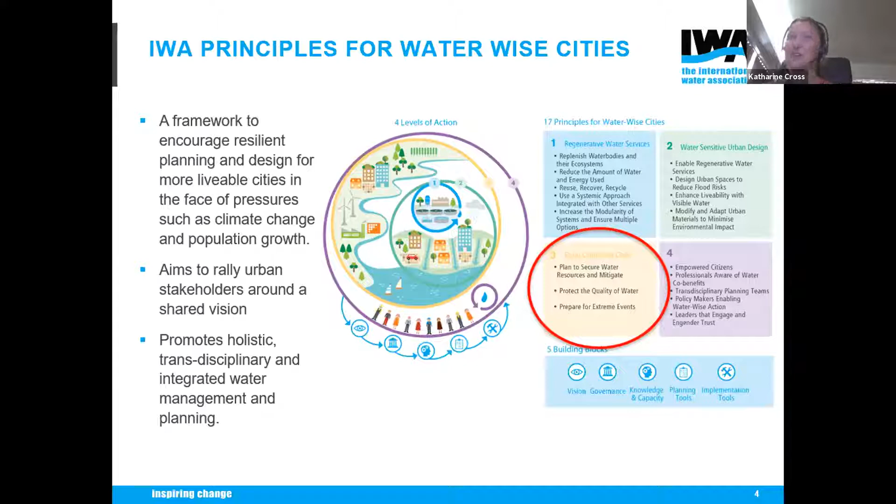So to give some context, basin connected cities, when I talk about that, I'm really talking about a system of systems. So, for example, we can reuse water from urban and peri-urban areas in ecosystems and also in agriculture. Water efficiencies in agriculture can improve water supply to ecosystems and ensure water supply in urban areas. At the same time, increased water efficiencies might mean there's less return flow to ecosystems, so that has to be taken into account. Ecosystems provide services such as flood mitigation and groundwater recharge.

And ecosystems also provide green infrastructure that can improve the quality of water by healthy watersheds or constructed or natural wetlands, which can help improve water quality, so less money is needed for chemicals, and then maybe less energy is needed for water treatment. Then urban and peri-urban areas and agriculture produce waste that can be potentially used for creating energy in the form of biogas. Ecosystem services can be used for reducing pollution, as I mentioned earlier, and also for carbon sequestration.

So this showed examples of connections with the watersheds we rely on. So in this context, IWA in 2018 released the Action Agenda for Basin Connected Cities. And this builds on the principles for water-wise cities, but really looking at that third level. Thinking about how can we achieve water security within our watersheds in the coming decades, but also what can we do now? What can urban stakeholders do now to achieve sustainable management of basins into the future?

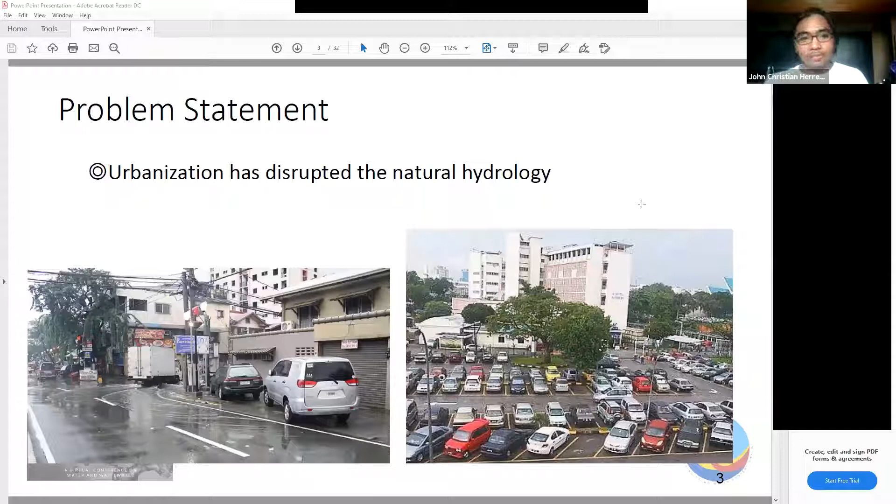The impact of urbanization is basically this: from natural ground cover, as we increase the number of roads and buildings, we increase the impervious surfaces. Our old infiltration when we had natural ground cover was around 50%, turning to about 15%. In turn, because it's a water balance, the water just goes from infiltration to runoff—we also turn that 10% of runoff back to 55% once we're in an urbanized state, like Metro Manila.

So what we're proposing is to basically mimic the natural hydrology, and to do that, we have to copy natural processes. So what we're trying to do now is take that infiltration from a low 15% and get it as close to 50% again as possible, and in turn possibly and surely decrease that runoff from 55 to 10.

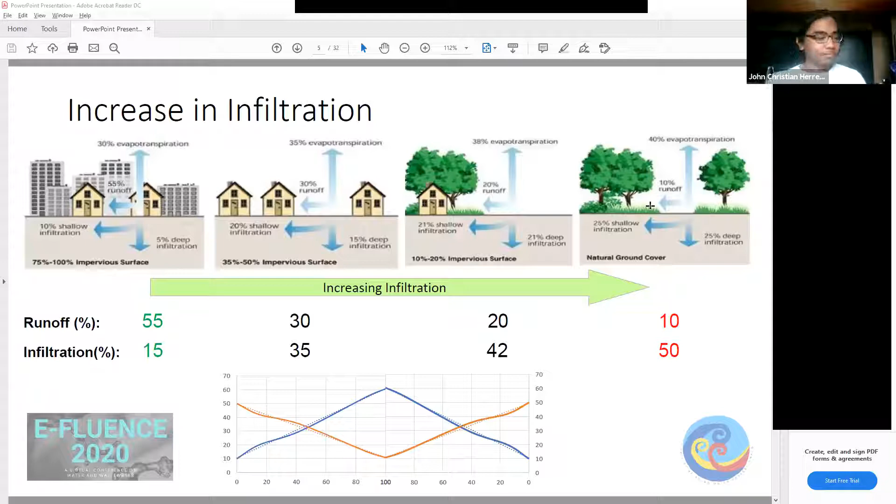To do that, these are green infrastructure that we use within our existing systems. This is a type of system within the bigger system, as we mentioned before. It's a very good thing to add in sustainable urban planning, because what we're doing now is using oversized pipes and flow control devices—these mechanical means—to handle all the water management we experience when it rains.

What we're doing is slowing down the water so we could manage it, doing flow control and detention using detention tanks and such. But if we open up to the ideas of nature-based solutions like LID, we're able to tap into more biological means of managing our water systems to supplement our oversized pipes and flow control devices. Instead of just slowing it down, we could spread and soak this water, possibly filtrating it, infiltrating it into the soil, and even treating it. So that hits both the problem with quantity and quality of water.

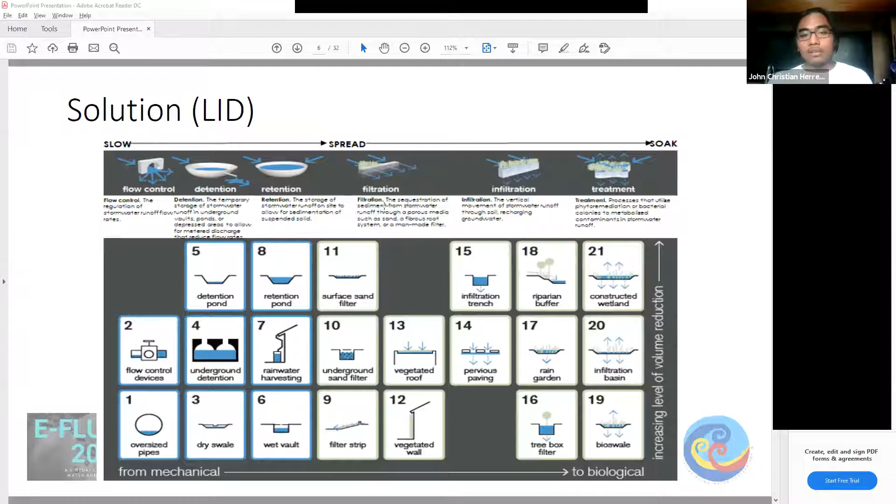In this specific scenario, we'll be talking about the infiltration trench and the rain garden, because those two focus on infiltration. The infiltration trench is a device with a media where it lets water accumulate and then seep into the soil, while rain gardens are sort of the same. These aren't necessarily to replace the oversized pipes or flow control devices—they're there to supplement them. Instead of letting our oversized pipes carry the entire load of our water resources, we could split it into the infiltration trench, reducing operational costs and supplementing their services.

So what exactly are we trying to do here? In this specific study, we're trying to investigate the effect of applying these LIDs, infiltration type LIDs, into the water balance of an urban catchment in San Juan City.

To do that, we have to check the viability of the LID. How well does it work? The second one is to develop a method with the available data. As you may know, here in the Philippines our data is not as complete as compared to first world countries like Korea or the US, where this type of study is more dominant. So what we're going to try to do here is design and study this further.

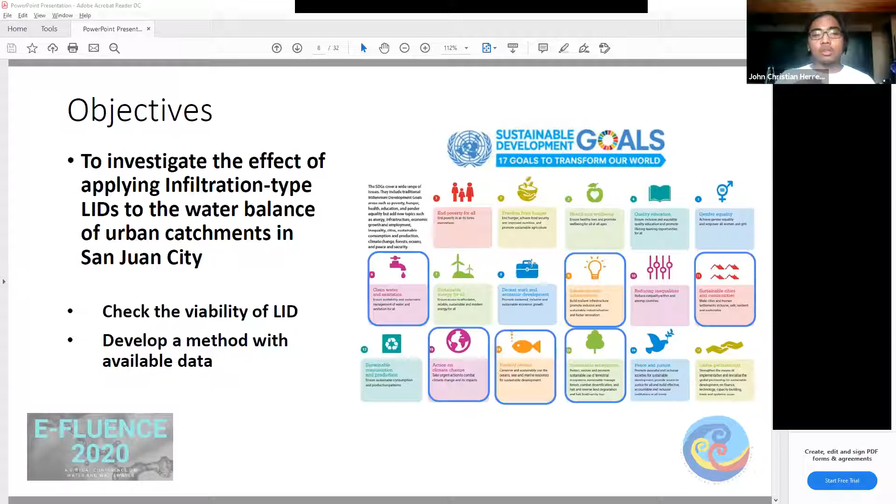You might be asking, why are we actually choosing San Juan? Well, that's because it's under the Philippine Clean Water Act of 2004. It's called a Water Quality Management Area, an area designated as a focused area that we should clean because it does affect a bigger watershed, as we mentioned a while ago.

The larger watershed is what we're trying to protect by protecting the city. In the San Juan River system, WQMA, we're basically going to be cleaning up the San Juan River from the source, from the city itself, instead of cleaning it at the output point.

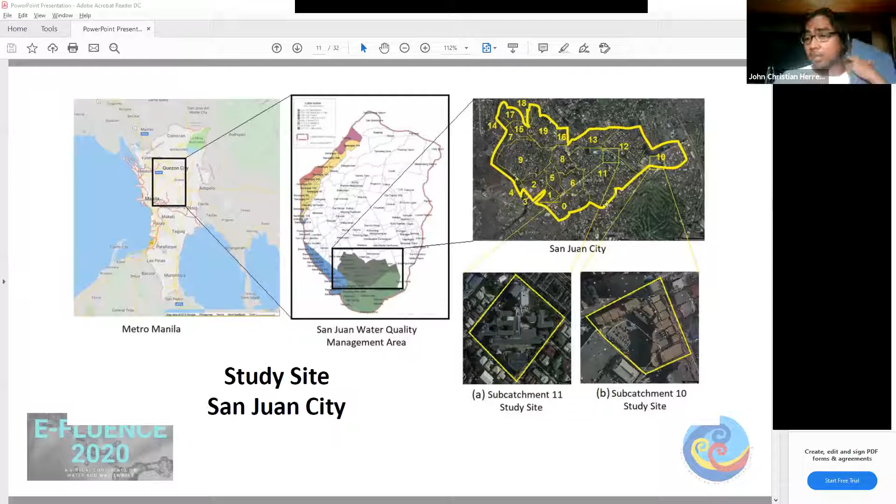So this is our study site, San Juan City. It's actually within a bigger area called the San Juan Water Quality Management Area, which includes Quezon City and Mandaluyong. But for this one, we're going to be focusing on San Juan City. In San Juan City, we chose two specific subcatchments, subcatchment 11 and subcatchment 10. They're basically office buildings, parking lots, schools, factories, etc. Those are the kinds of surfaces we're going to be seeing.

Our method is quite simple. We gather the input data from Pag-asa, NAMRIA, local government units—rainfall data, topographic map, land use—and we use Google Earth. We input that data, analyze it, characterize the rainfall, delineate using QGIS, observe the land use, and assign runoff coefficients, etc. We basically make it compatible for SWMM, the model. Then we plug it in, and from there we get the infiltration, the runoff, and the storage. That will be the water balance of that specific scenario.

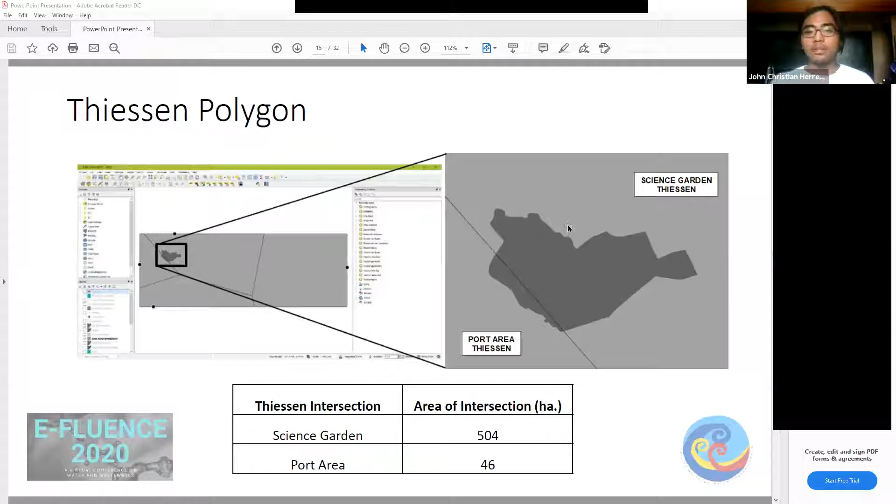So we got two rainfall gauges in our area, and in those two rainfall gauges we basically got a 30-year total annual rainfall of about 3,000, 2,700 millimeters. That's important data because if you design this in Korea, it would be a completely different rainfall. In fact, if you design it anywhere else in the Philippines, you would have a completely different rainfall as well because we have 4 climate types. So that matters when we're designing.

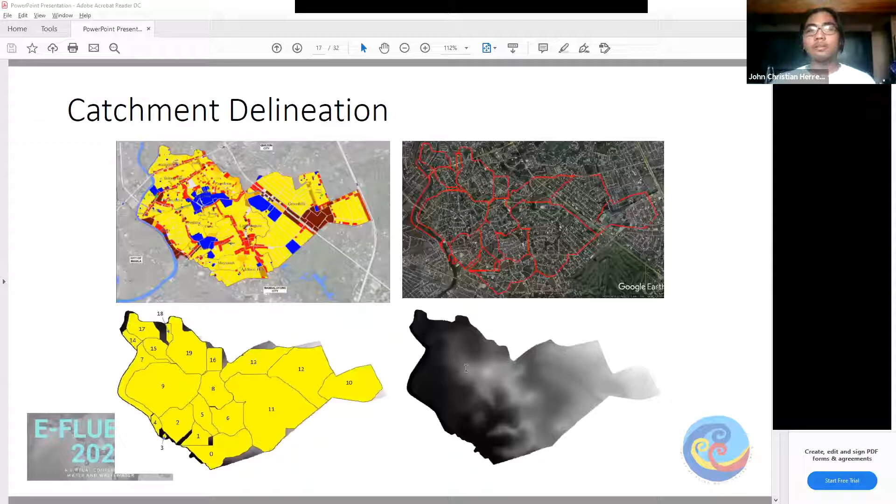When delineating, we got the topographic map, ran it into QGIS, and got about 20 subcatchments. We delineated it using runoff coefficients, which we got from JICA, the design guidelines. In modeling, we use 2 infiltration rates, hydrologic soil group A and D, with the highest and lowest infiltration rates of 1.63 and 0.06 inch per hour.

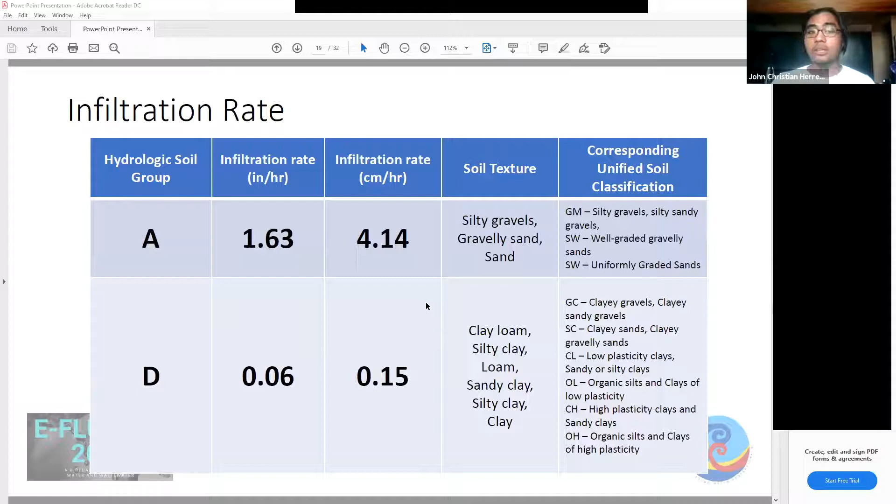So this is the 90th, 80th, and 60th percentile rainfall that I explained a while ago. The cumulative frequency occurrence is basically the amount of rainfall that you could capture if you design your device to capture this much water. For example, we have a rainfall event that's 42.2 millimeters. If you design your device to capture 42.2 millimeters of rain, you will capture 90% of the rainfall events in that year.

The rest will probably overflow. The same goes with the 80th percentile—23.5 millimeter rains—if you design it with that, you capture 80% of the rainfall. The same goes with 60. That's important because when we're designing LIDs, you're not trying to capture storms.

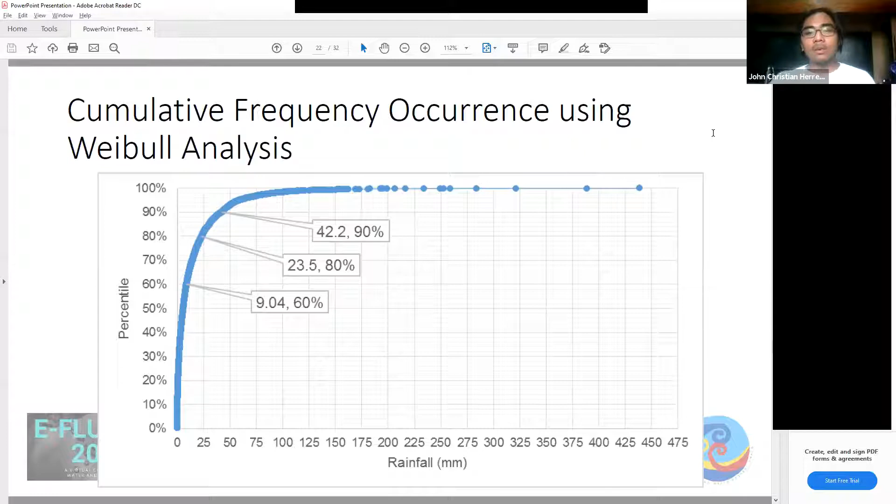We're trying to capture the majority of rains. In normal rainfall, we don't want it to flood, so basically we're just going to divert it into our device. We got all those data and we put it in SWMM.

It does have a built-in LID control to simulate, and this is the findings that we got, the water balance. We had, within this slide, the 30 scenarios.

These are the charts based on soil type, and this is the chart of all the numerical data. Dark blue means infiltration, light blue means runoff, and the green is storage.

Storage is basically the amount of water stored in the subsurface, so that's normally about the same. But what does change and what does matter in this specific study is the infiltration and runoff. The first thing you will observe is that without LID controls, you could see a significantly low infiltration rate.

That's 8% in a 90th percentile rainfall, that's about 42 millimeters, or 42 a while ago. And that's 14 at an 80th percentile rainfall. Basically, it's lower than what we should expect. Hydrologically, it's supposed to be about 50%, but this one's closer to the 15% that we saw at a highly impervious city.

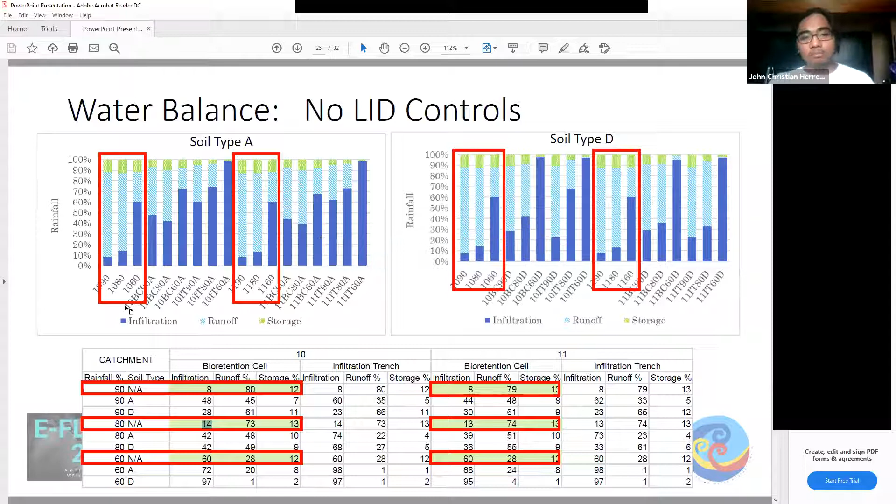So we're going to be comparing the 90th percentile on the next one. In the 90th percentile, we're going to be comparing without LID controls here with the two LID controls, bioretention cell and infiltration trench. You can see here that without the device, it's about an 8% infiltration.

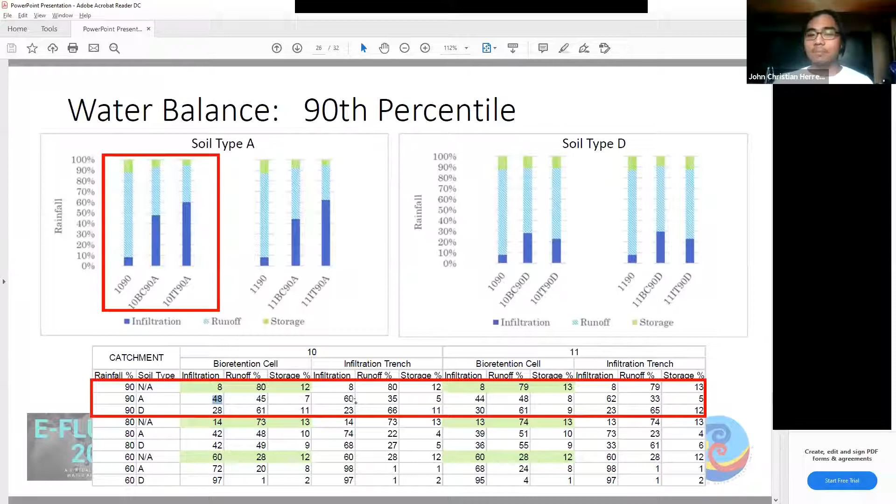But with the bioretention cell, that goes from 8 to 48, that's a 500% increase in infiltration. That's more water that we're diverting away from the pipe, so it has less load to consider. And with an infiltration trench, it's even higher, up to 60%.

Comparing LID devices, the bioretention cell and the infiltration trench, we could see that the infiltration trench performs better when it comes to infiltrating, as it should, because infiltration trenches are focused on infiltrating a larger amount of water compared to a bioretention cell. A bioretention cell, while it may infiltrate, is more focused on treating the water using vegetation, so we should take that into consideration. Even though it has less infiltration, there are benefits in using a bioretention cell instead.

Also, it's considerably aesthetic because of the vegetation.

So to conclude, the study showed three things. One, there is a site sensitivity for LID. The variability of the climate, the soil type, the land use data, these are completely different based on the manual, are actually very sensitive. When you design them, you have to design them for that specific area you're designing for. You can't just get an LID from one place and plug it in another.

So studies and further research in the Philippines is actually quite important. There is significant infiltration with LID. The summary of water balances shows the significant increase, as we said a while ago. And because of that significant infiltration, there is a corresponding reduction in surface runoff. The water balance shows this relationship.

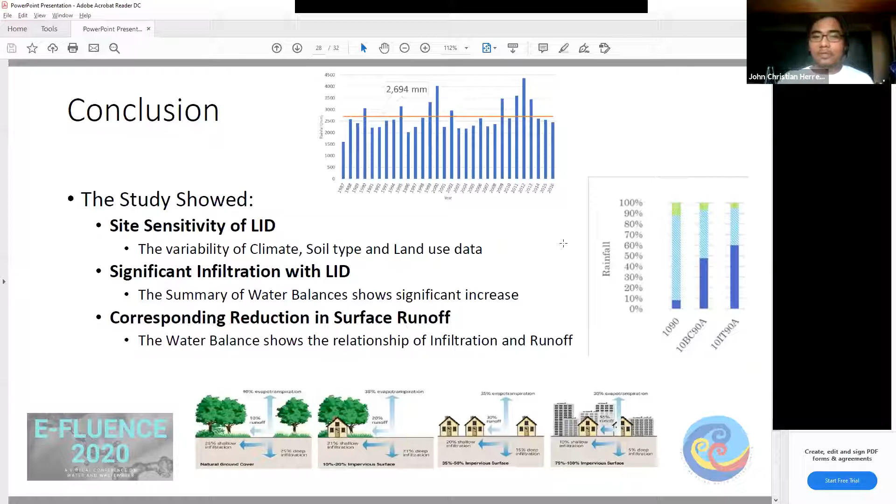Yes, so this is us now with our paved roads, buildings, impervious surfaces, and hopefully with the application of green infrastructure - green roofs, tree boxes, constructed wetlands, bioretention cells, infiltration trenches - this may be us soon with our green infrastructures and LID.

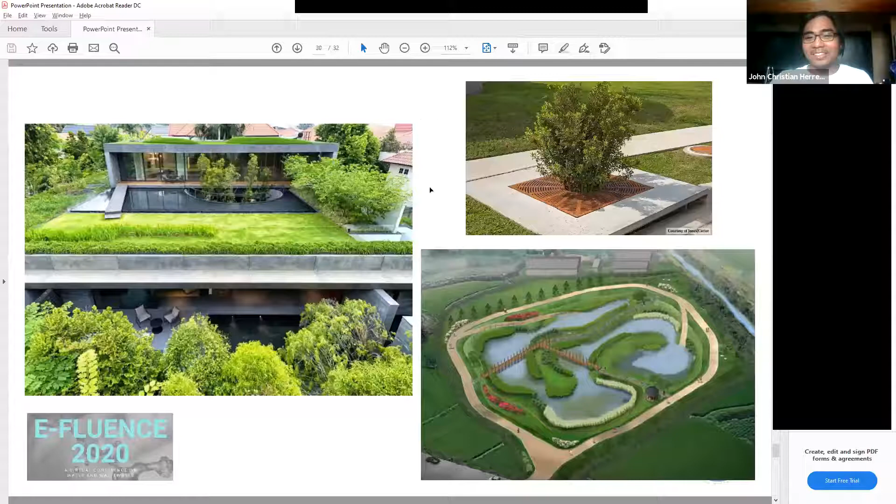You can see that this one is the landscaping LID. LIDs are actually very aesthetic and functional. So it's a step closer to water security by applying these functional and aesthetic LIDs. A step towards water-wise cities. Thank you.

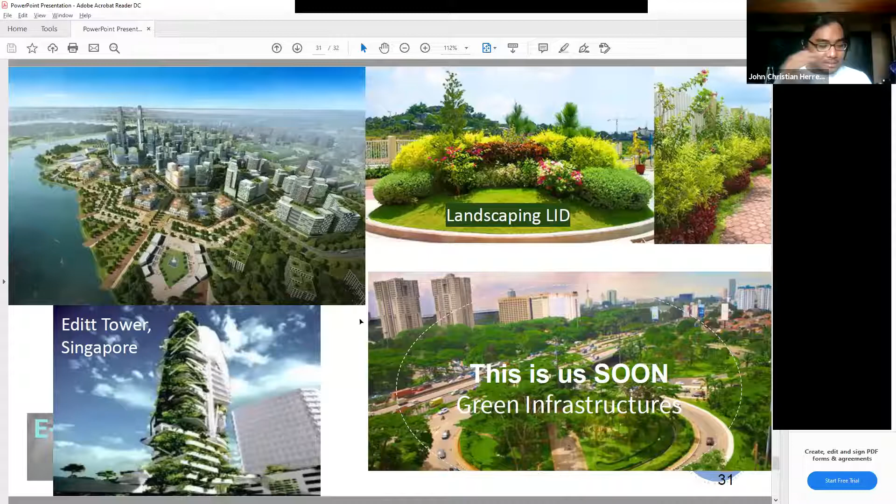And from stormwater management, let us move on to network pressure management for water utilities, network optimization. This will be presented by Engineer Rafael King Ramos, who has been active in the field of water supply operations with Maynilad Water Services Incorporated for 10 years, where he was a water network engineer in charge of supply and pressure management of a distribution network which covers 1.6 million customers. He's currently the head of Solutions Design Group in charge of formulating strategies in operational efficiency and technology adoption.

He co-invented and developed a system, controller, and method for controlling supply of fluid in a distribution network, published in 2016 through the IPO Philippines. His area of interest includes human-centered design and data analytics. He's a graduate of civil engineering from the University of the Philippines in Diliman and has obtained certifications in entrepreneurship and management from the Asian Institute of Management and Ateneo Center for Continuing Education, respectively.

For our second presentation, King. Hi, thank you, Yang, for the introduction. Can you hear me? Yes, it's clear. Okay, so good day everyone, or as we say in Maynilad, maginhawang araw sa ating lahat. I hope all is well sa lahat ng nanonood sa atin ngayon.

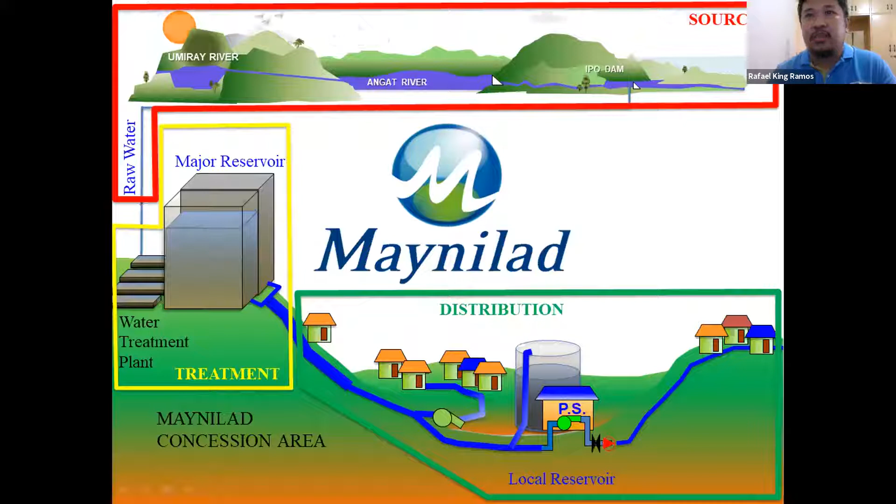Now, for my presentation, the focus mainly is on the optimization of supply and pressure in the distribution network. Prior to the new consortium, water supply availability and pressure are luxuries to our service area. In fact, we started with only around 60% coverage, and less than half of which had 24 hours of water supply. Also, one of the challenges is the high non-revenue water, or in short NRW, primarily because of losses in the network caused by this.

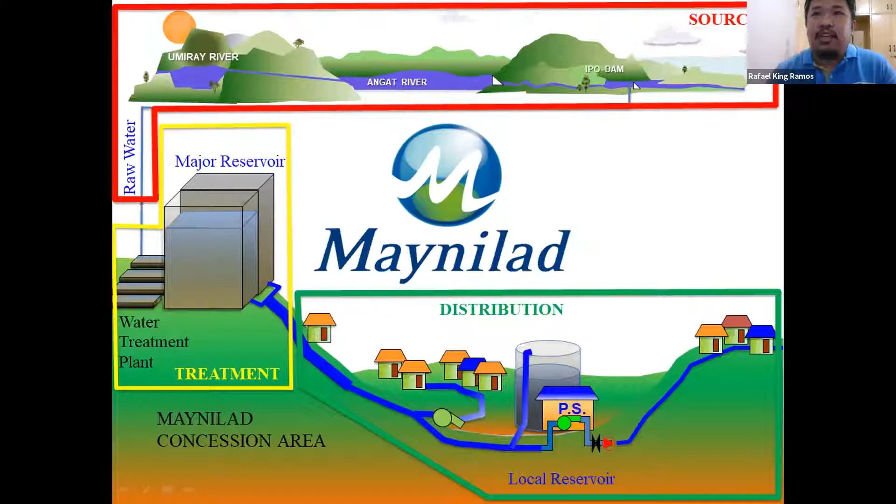If we look at the cross-section of a pipe, we can see from this illustration that pressure pushes water towards the wall of the pipe.

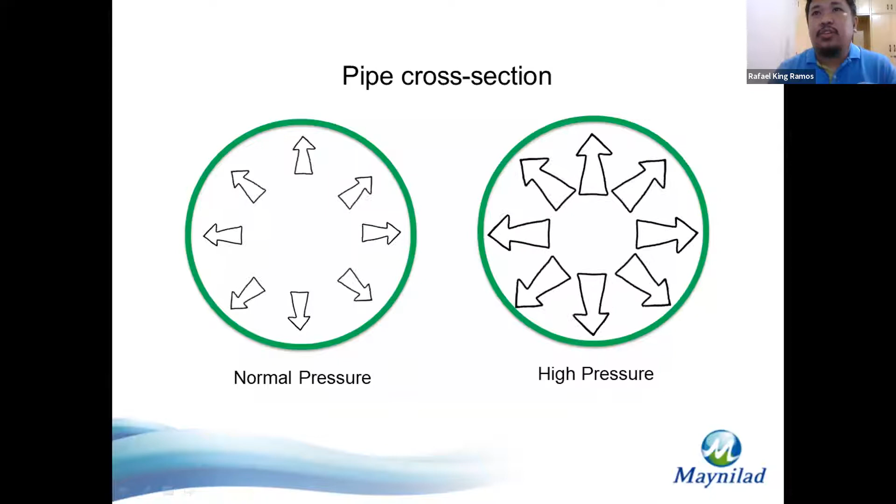This changes depending on the operation of the source and depending also on the demand for that water volume. Maynilad pipelines are designed to a maximum of 150 psi, but normally pressure in our lines is around at least 16 psi.

Going back to these photos, if you look closely at the illegally tapped lines on the upper right, the workmanship is, if I'm going to rate it, 0 out of 10. If that fails, and most of the time it will, there will be water losses.

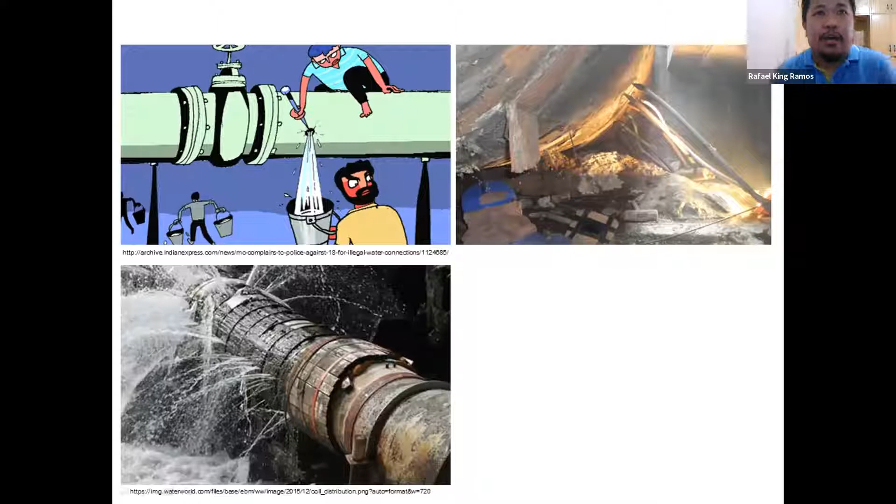For this one, like for example on the lower left, this is an example of leaks in the primary lines. This is in a way actually good for our NRW engineers because water leaks are easily spotted since it is above ground. But not all leaks are above ground, like this one in the photo, where the leaks are underground.

Now, based on what I showed you in the previous slide, pressure in the pipeline plays a major role in managing these leaks and losses. Pressure is actually directly proportional to leakages. So if you have high pressure, the volume of leaks is also high. So if you want a lower rate of leaks, you need to reduce your network pressure.

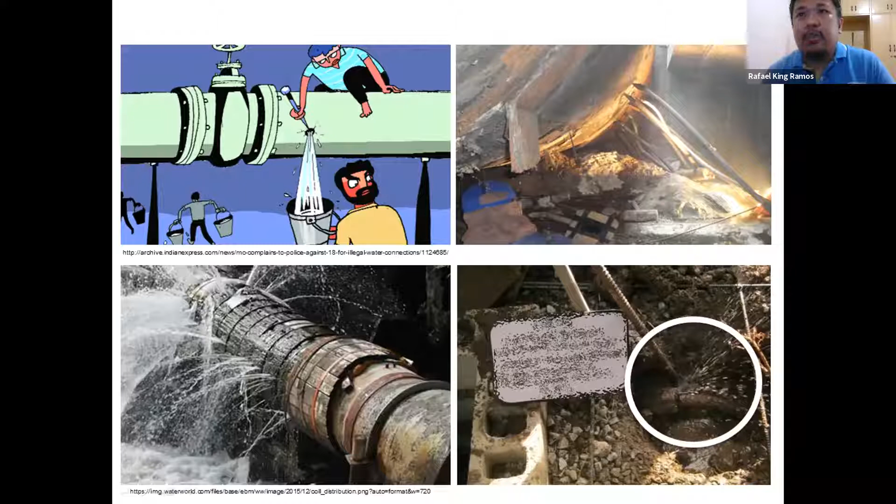But eventually we realize that there is a tension in our objectives in Maynilad. Looking closely at the distribution, there is a source, and then there are pipelines and customers at the end of the line, and then there are leaks, and then we have valves.

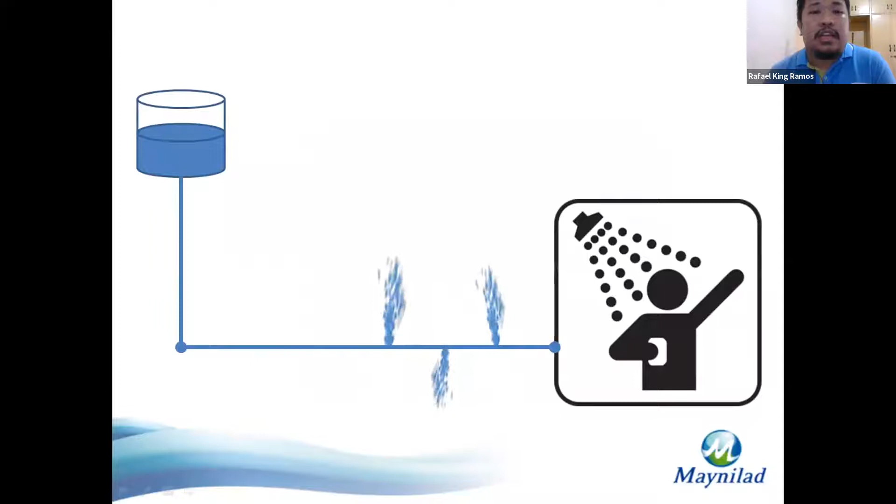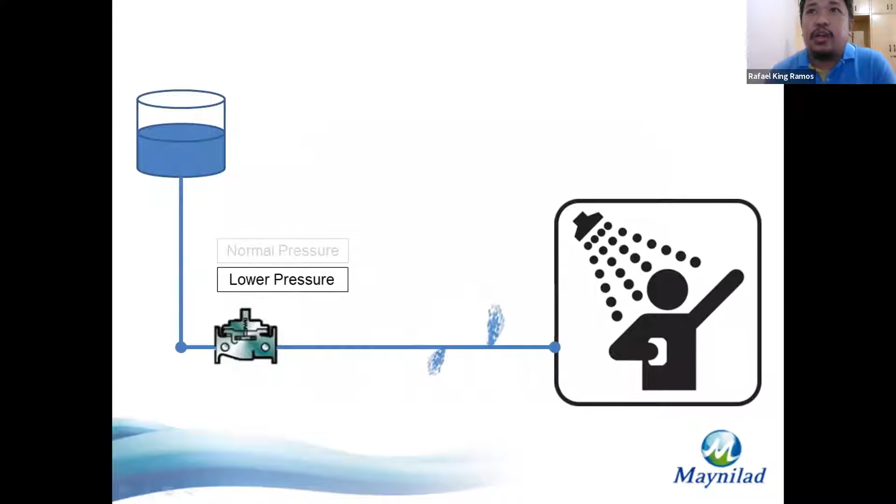So we say that we need lower pressure to reduce water losses in the network, and that is absolutely valid. When we lower the pressure, the leaks will be reduced, but on the end of it, pressure also affects the volume of water that could be delivered to our customers. So pressure management affects both leaks and consumption.

Actually, that's where the tension lies. So, considering the target to reduce leakages and the target to maintain sufficient pressure for customers' consumption, do we have a way to hit both?

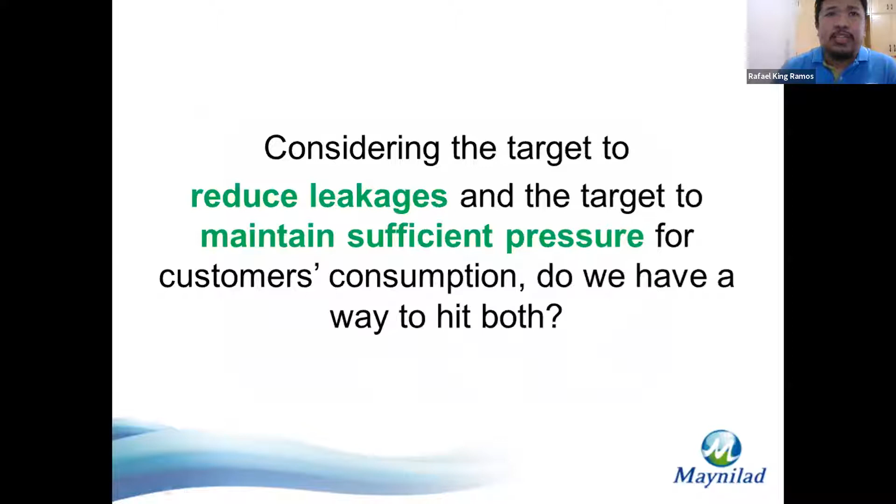This tension actually inspired us to develop the pressure management program in Maynilad, the pressure optimization in our network. So the goal of this program is to find the sweet spot. We need to lower pressure to reduce leaks, but not too low that it will affect consumption.

There are 5 major steps in our program, but for this discussion, I will focus on the analysis part. I will show you the workflow that could be used also by other water utilities on how to arrive at the optimum pressure considering both consumption and leakages. So, if you look into the context of data analytics, it covers the descriptive analytics and the prescriptive part.

So, at the minimum, your target area for pressure optimization should be isolated. This is commonly called DMAs, or district metered areas. But the general idea is it has to be one inflow only. For the data requirement, you should have flow and pressure measurement, flow and pressure at the source, and in Maynilad, we normally have measurement at critical points.

And then, by the way, the critical point is a point in the influence area with the lowest pressure. So if you can satisfy the required pressure at the critical point, you are assured that pressure at all the points within the network is within the pressure requirement. This is usually at the highest location, or at the location farthest from the source.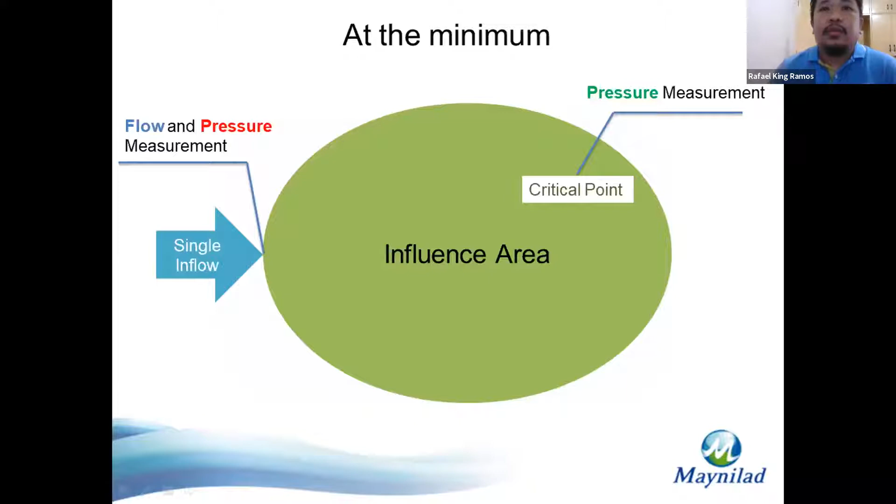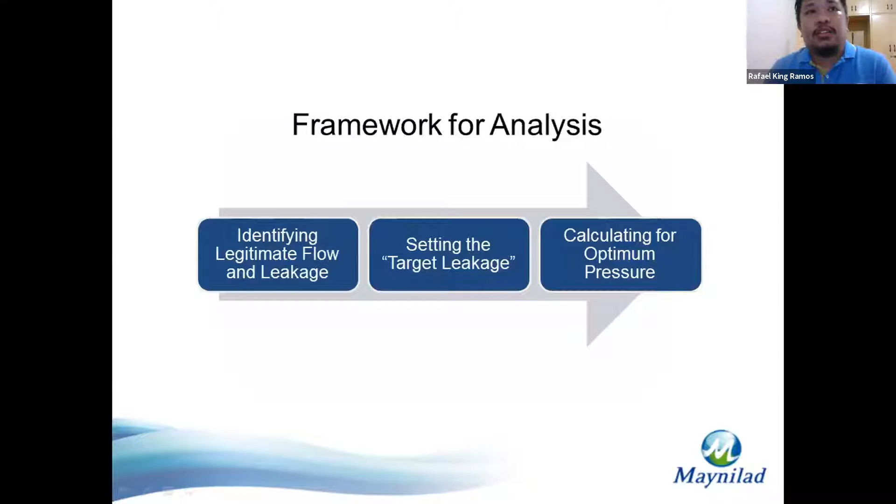This is the framework for the analysis. It's a three-step flow process. The first part's objective is to identify the legitimate flow and leakages.

From the continuity equation, it's actually easy to get this if you have flow measurement in individual customers. You will just subtract the sum of individual meters or individual measurements on all your customers from the inflow measurement, and then you will get the leakage. But it is not yet economical as of the moment, at least for Maynilad.

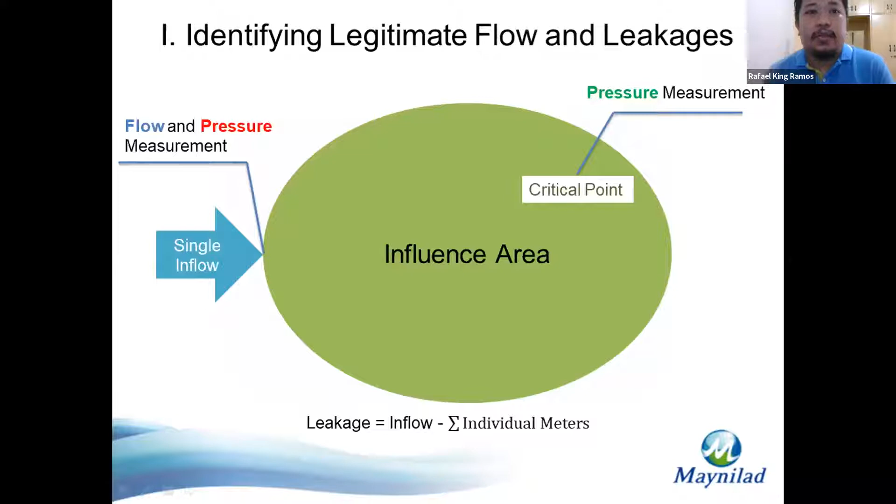So we use a different technique called the night flow analysis. The premise there is that reading at night time is consistent. So we read flow during night time, and then we go back after 1 hour, 2 hours, and then we read, and through that we will be able to identify the composition of that flow at that particular time. So we will arrive to this.

So we'll have the actual leakage and then the legitimate flow. Through night flow analysis, we'll be able to arrive at these estimates. And once we have those estimates, we will now calculate the composition for the rest of the hours of the day using the FAVAD concept. So the simplified version of the equation is shown.

It shows that changes in pressure raised to the power N1 varies with change in leakages. It was derived from the energy equation, so the velocity of a leak varies with the square root of pressure and the coefficient of discharge. But FAVAD also recognizes that the effective area of some leakage paths, the pathway the leaks go through, may vary with pressure. So that adjustment happens using N1.

Just to illustrate, leaks on metal pipes normally have low N1 values compared to softer materials like plastic and HDPEs. This is because pressure also affects the nature of leaks in these materials. For example, for HDPE, lateral cracks expand as the pressure inside the pipe increases. So the higher the N1 value, the more sensitive existing leakage flow rates will be to changes in pressure.

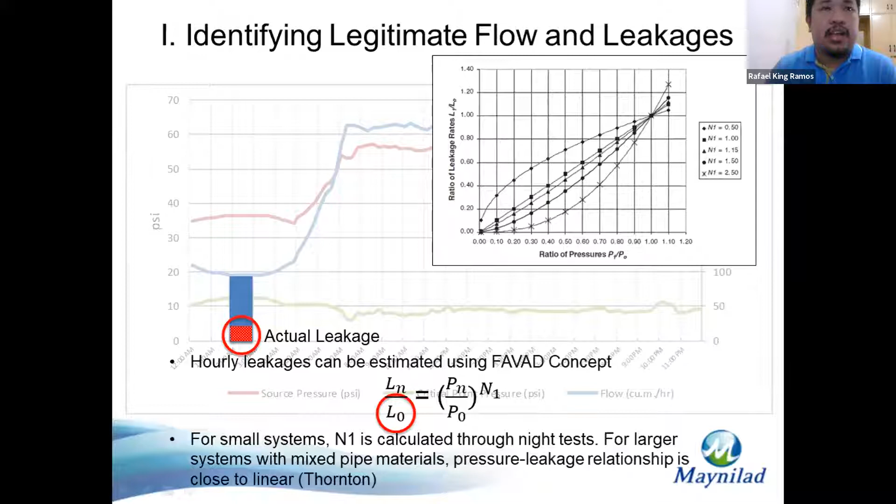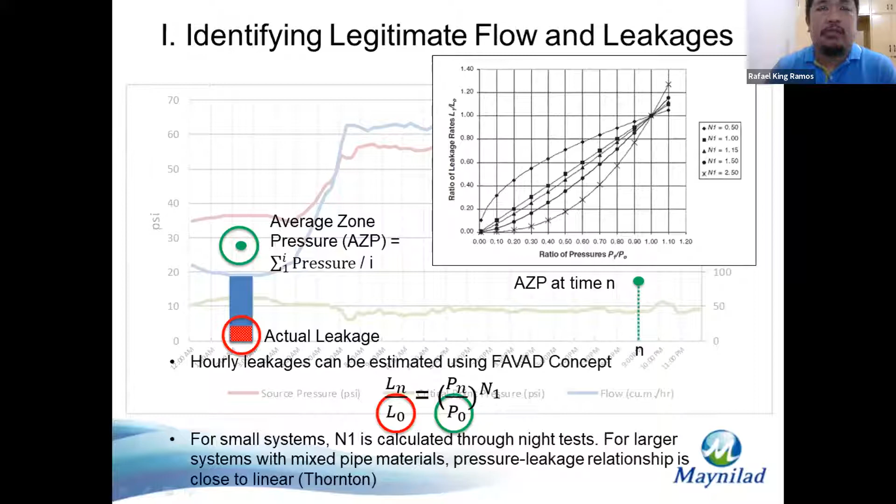The goal for this first step is to create the leakage model such as this one on the right. Actually it's just a matter of plugging in values. We'll use the actual leakage for L naught, then we'll get the average pressure, plug into P naught, then we'll get the average zone pressure at time N, actually our target hour, and then we will arrive at this chart on the right.

Again, the goal for this first step is to create the leakage model such as this one. And then the next step is setting your target leakage.

One way of setting this is by computing for the UARL. There are techniques to compute for this, but basically this is a function of the condition of the network, like level of pressure, length of mains, number of connections, etc.

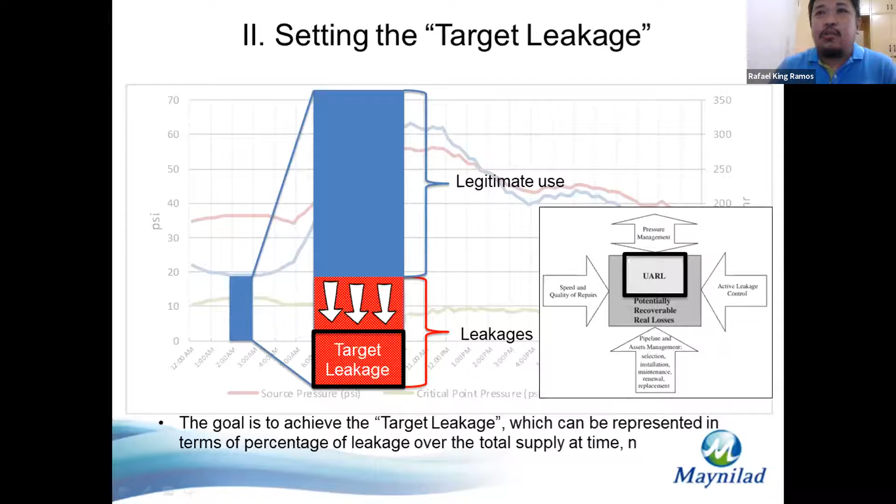This step is the simplest, but I could say it's one of the most important parts because this is usually anchored to the organizational objective of reducing NRW. If you've already identified the target level, you may now compute for the optimum pressure, which will be covered by the next step.

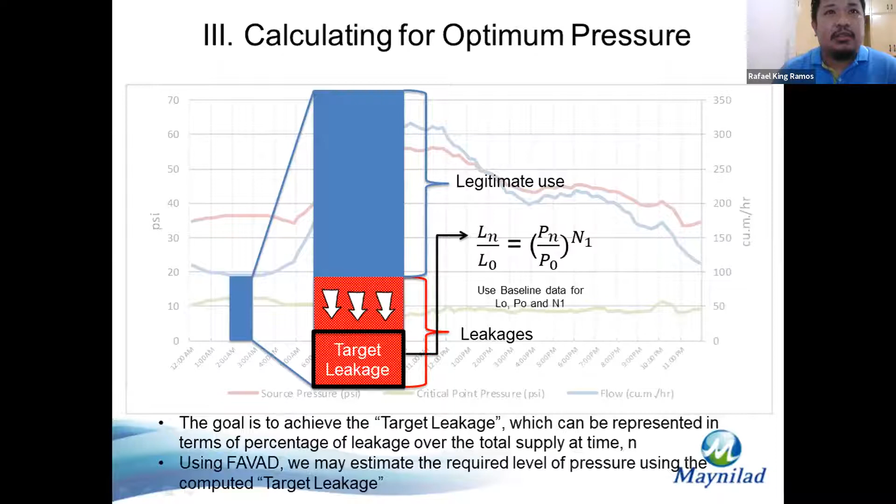For this step, we will again use FAVAD by estimating the leakages. It's just a matter of plugging in. For the target leakage, that will be the final L sub N, and then we will just use the baseline data for L naught, P naught, and N1. Again, N1 depends on the materials or the nature of leaks on your network. The target for every hour can be computed using the percent NRW target.

So for example, your target is 20% NRW. You will just multiply 20% by the supply for the particular area. There will be cases when your target leakage is higher than the estimated leakage, like this one on the right. This usually happens during peak hours. During this time, demand is higher, so the pressure is low. As described in one of my previous slides, lower pressure results to lower leakages. The output of this step should look like this.

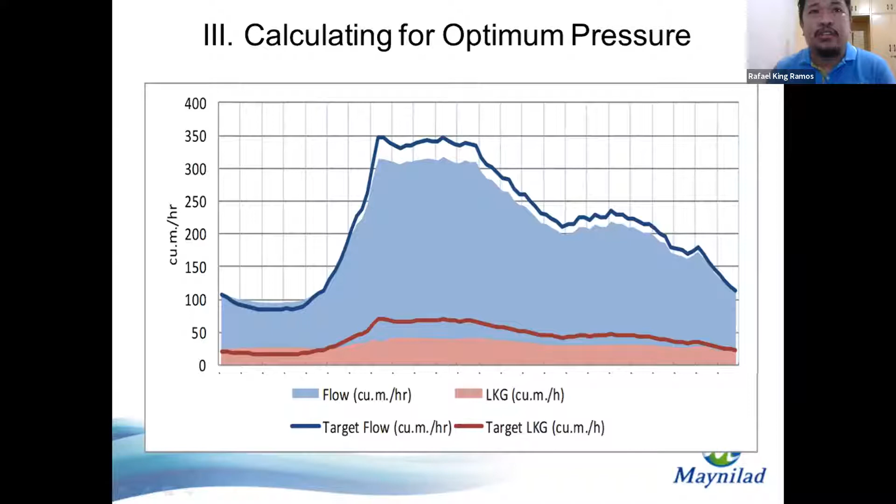On the y-axis, you'll see the flow, and then the line chart, you will see the target flow and the target leakages. As mentioned a while ago, it is normal for target leakages to be higher during high flow. It only means that your percent NRW during that time is lower than your target leakages, and correspondingly, you will be able to compute for the pressure.

During the implementation, there are other factors considered, like for example, what's the minimum service level requirement on that particular influence area. There might be cases that the area needs higher than normal pressure, like for hospitals or for industrial areas. You need also to consider the capability to adjust pressure, the pressure saturation, and the condition of valves, because your setting could cause cavitation, and you will also have to consider the seasonality component.

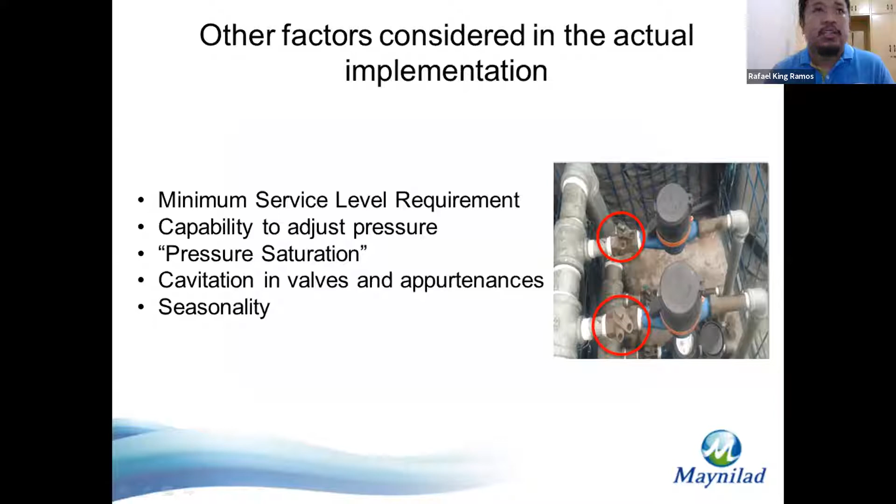The analysis when we started pressure optimization was very mechanical, but through IoT devices we were able to semi-automate everything from data gathering to analysis to control to monitoring of the effects of the set point. This diagram shows our simplified architecture. On the leftmost, we installed around 5,000 IoT devices scattered in our concession area. Then all the data were sent remotely to our server. During the analysis, our engineers can easily extract data from these servers, and the output will serve as the reference on how we should control our operations in the field.

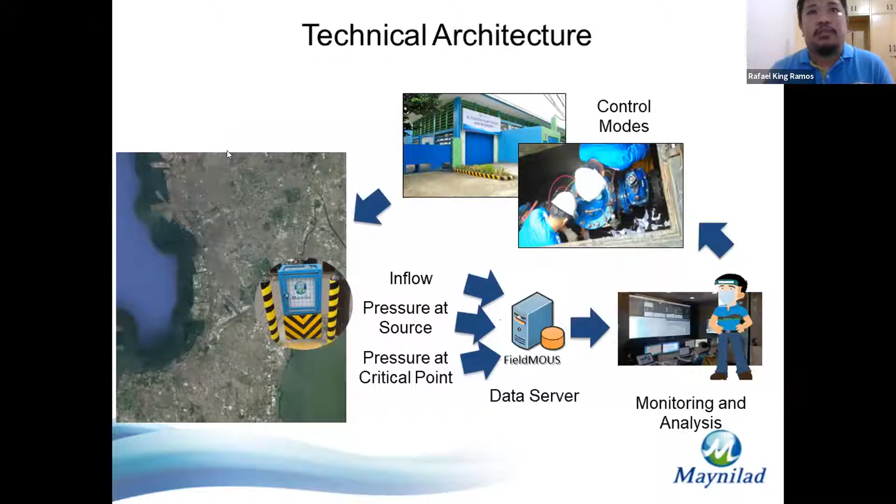Again, there are lots of control modes here, like for pumps, it could be through pump stations or valve setting or other modes of control. Since 2007 our connections have increased by around 500,000, but through this optimum pressure management we're able to manage our supply efficiently. Together with other initiatives in our organization, we're able to provide enough volume for the need of our customers, and at the same time reduce water losses in our network.

I could say that that's really an effective workflow that could help water utilities in managing supply and pressure. So that ends my presentation. If you have other questions related to water supply operations, my email is here.

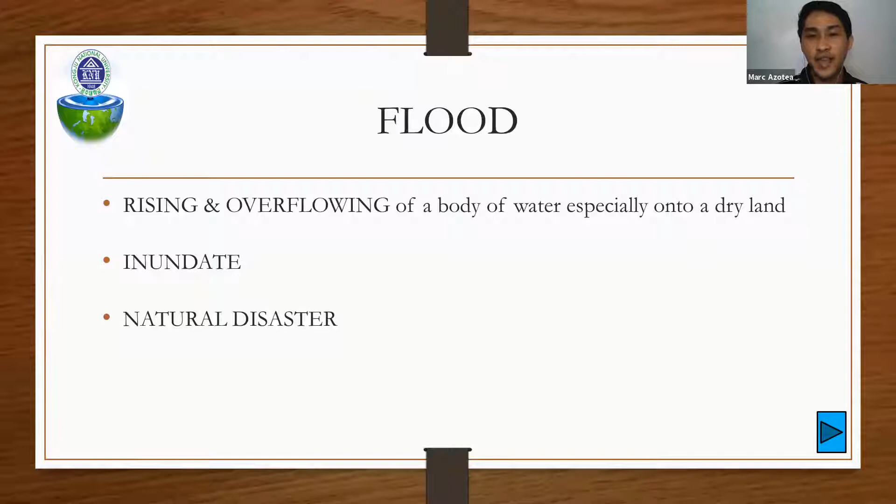As I said, flood is one of the natural disasters. We have plenty of natural disasters in the world, one of which is earthquake. There's also volcanic eruption, tsunami, typhoon, and many more. So flood is very rampant in the Philippines.

So the researchers, having thought of the problem of flood, wanted to tackle flood vulnerability index. The flood vulnerability index is an index-based methodology - a tool to assess the level of harm of a certain area.

It involves first the indicators. In the world there are a lot, actually thousands of indicators. But since we're dealing with flood vulnerability index, the researchers collated a total of 252 indicators. But that's a big quantity, so we screened it and came up with a final set of 31 indicators.

This is composed of four components: social, economic, environmental, and physical. The social deals with the people, the awareness, the welfare. The economic deals with GDP, or how the economy grew for that certain area. The environmental and physical deal with the countermeasures.

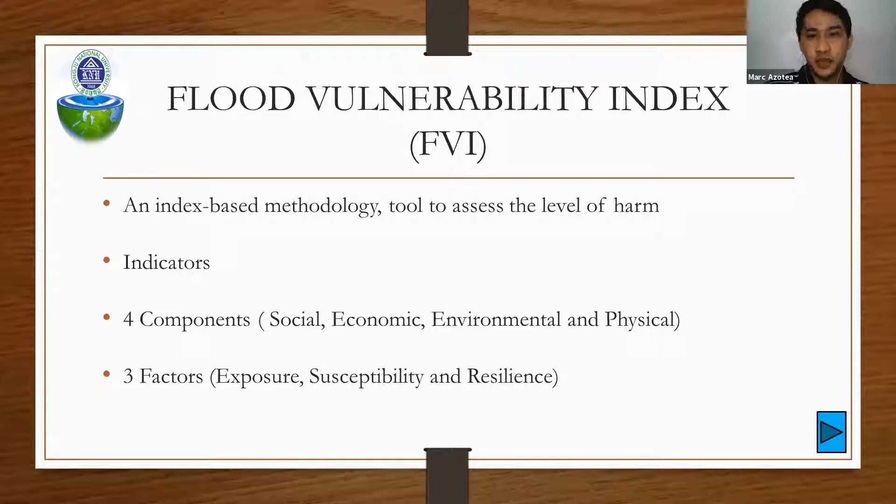Lastly, there are three factors for the separation of all the indicators: exposure, susceptibility, and resilience. Exposure and susceptibility are directly proportional with vulnerability, while resilience is indirectly proportional. To put it simply, exposure and susceptibility increase vulnerability, while resilience decreases it.

So we go to the localized flood vulnerability, the main objective of this research. The aim is to obtain a comparative visual analysis of the flood vulnerability index on a localized scale in the Philippines. It is a smaller scale, and it is new in the Philippines when I performed this. It is recommended by many researchers because it is more accurate and reliable.

We already have one flood vulnerability index here in the Philippines, but it's on a river basin scale. That research tackles the 18 river basins of the Philippines and puts it in an index from a scale of 0 to 1. But since it's on a larger scale, my advisor and professor wanted us to deduce or localize it to a smaller scale. That's why we made this research.

The Philippines is an archipelagic country with a lot of islands, 7,641 to be exact - before it was 7,107. It is prone to several natural disasters, one of which is typhoons. An average of 19 to 20 typhoons hit the Philippines annually.

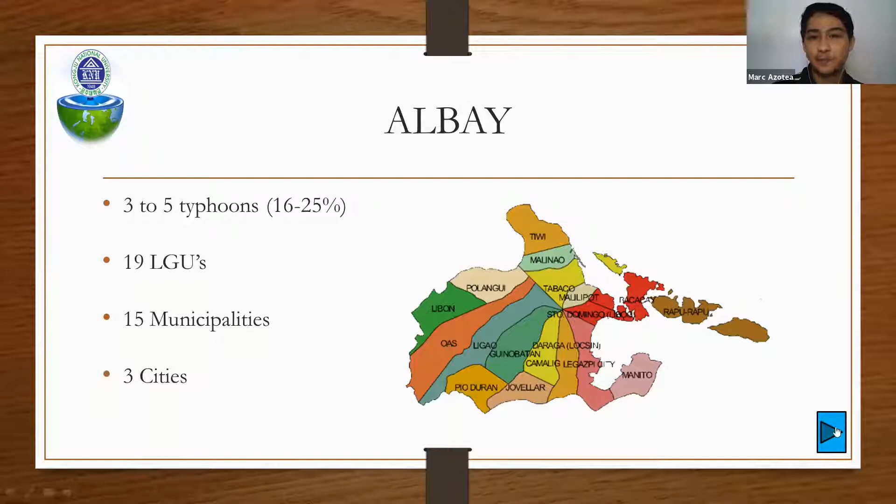However, due to time constraints during my research, we were only able to come up with 5 areas for the FVI research. First is Legazpi City, which has a total population of 196,632 and a land area of 153.70 square kilometers.

Next is Bacacay, with a total population of 68,906 and a land area of 122.13 square kilometers. Camalig, with a total population of 66,904 and a land area of 130.90 square kilometers. Guinobatan, with a total population of 82,361 and a land area of 244.46 square kilometers. And finally, Manito, with a total population of 24,707 and a land area of 107.4 square kilometers. These are the 5 areas that this research will deal with.

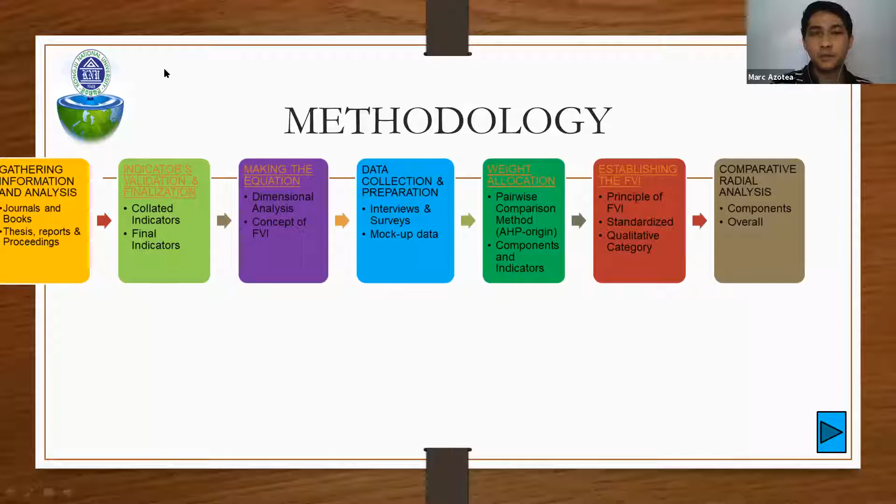So let us now go through the methodology. We have 7 steps. The first step was to gather information and analysis. We collated journals that were published, books, theses, reports, and proceedings, just to collate and summarize all the indicators that we needed to finish the flood vulnerability index.

Second, we used the indicators. We finalized indicators. As I said a while ago, there were originally 252 indicators, but we screened it down to 126. Unfortunately, this is still a very large quantity, so we based it on Saaty's report that, for example, for a component, at least a maximum of 9 is needed in order to use the random consistency index table. Later, I will show you the table.

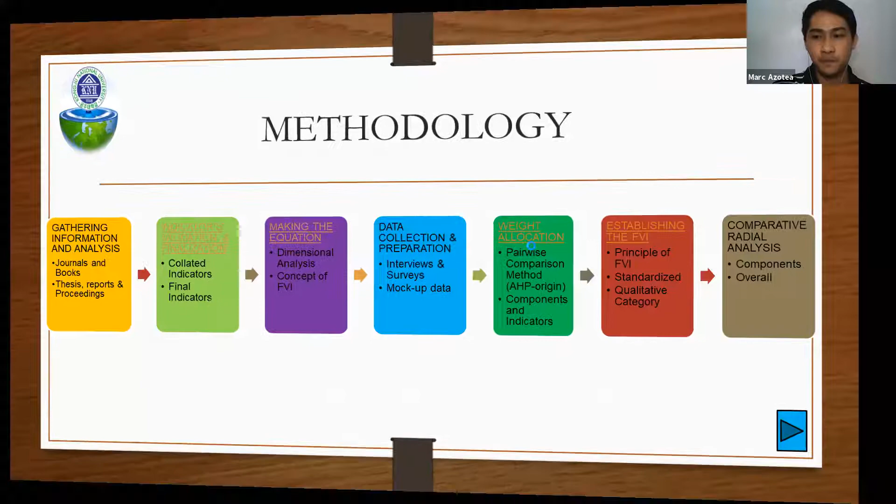And the concept of FVI is that exposure and susceptibility would be placed in the numerator, and resilience at the denominator. So this is the concept, and here are all the list of indicators.

The next step is, since we already made the equations, we need to get the data and prepare it. How do we do that? The researchers did interviews and surveys with the experts, professionals, and agencies concerned, and also prepared a mock-up data, which is a summary of all the needed information from 2006 to 2015. So we used 10 years of data, which is calibrated and verified using the first 5 years for calibration and the next 5 years for verification.

The next step is weight allocation. For the weight allocation, we used the pairwise comparison method, which originates from the Analytical Hierarchy Process, or AHP, for the components and the indicators. Here is the intensity of importance, or the numbers that the experts place relative to the importance of each category, component, or indicator.

For all the odd numbers, they are certain about the relations of each. For the even numbers, they are unsure or need to compromise. And reciprocals are also valid. So let me show you an example of how we did the pairwise comparison method.

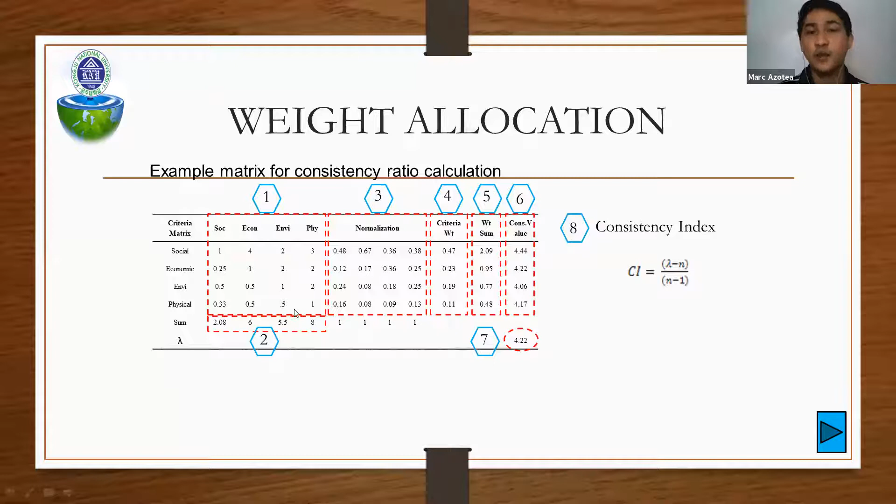Now, we will be using the RCI, or the Random Consistency Index table, the one I mentioned previously. So from that table, based on Saaty's research, for the n value of 4, the constant value that we will be using to get RCI is 0.9. So that would be used for our consistency ratio.

Why are we getting the consistency ratio? Because it would allow us, or it would tell us that our data is reliable and also good for use. However, there is a limit. If the criteria consistency ratio is greater than 0.1, then we cannot use it because it's still not good.

Therefore, you need to go back to the first step, wherein you will meet again with your experts and professionals. Then place again your level of importance to your indicators or components.

So next is establishing the FVI, wherein we will have the principle of FVI and standardized value. When we say standardized, it's a value or a scale of 0 to 1, and a qualitative category. I will show you on the next slide the qualitative category.

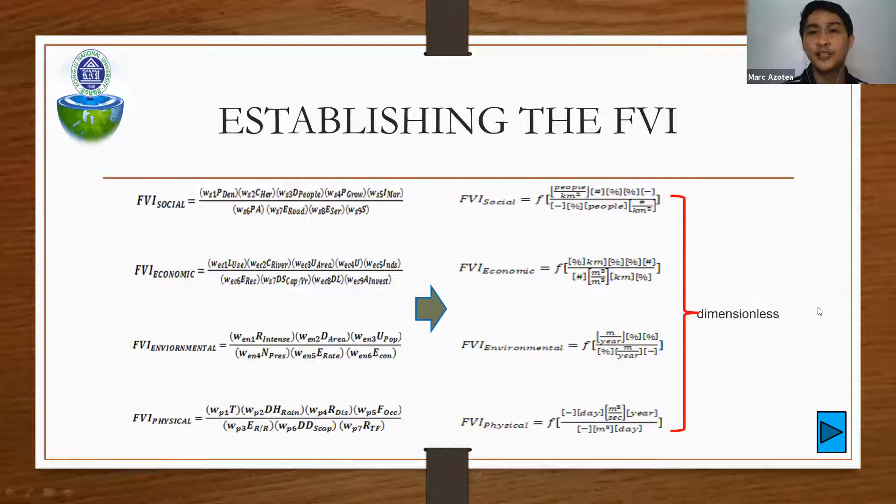And finally, we will have or obtain the comparative radial analysis, both for the component, and for the overall. So now we go on with our results.

So this would be representing the lambda. So we use that in the consistency index. So 4.22 minus 4 over 4 minus 1... we have 0.07.

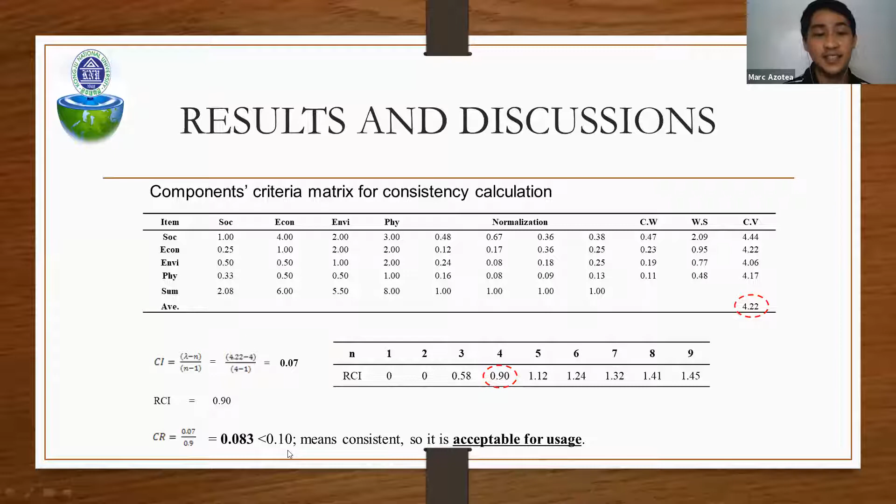And then check from the table of RCI, or random consistency index, so 0.9. Then from that, we could already place the values into our equation for the consistency ratio. So 0.07 over 0.9, the result is 0.083, which is less than 0.1, which means it's consistent, so it is acceptable for usage.

And then to get the consistency value, we multiply again the weighted sum by the inverse of the criteria weight. So just average again to get the lambda, and then use the equation for the consistency index, lambda minus n over n minus 1. So 9.79 minus 9 over 9 minus 1, you get 0.099. Then use the RCI table, wherein the n here is already 9. The previous one is 4.

So for 9, you will use 1.45. So get the equation for consistency ratio, 0.099 over 1.45, so you will get 0.068. So that is also less than 0.1, which means it's okay to use it.

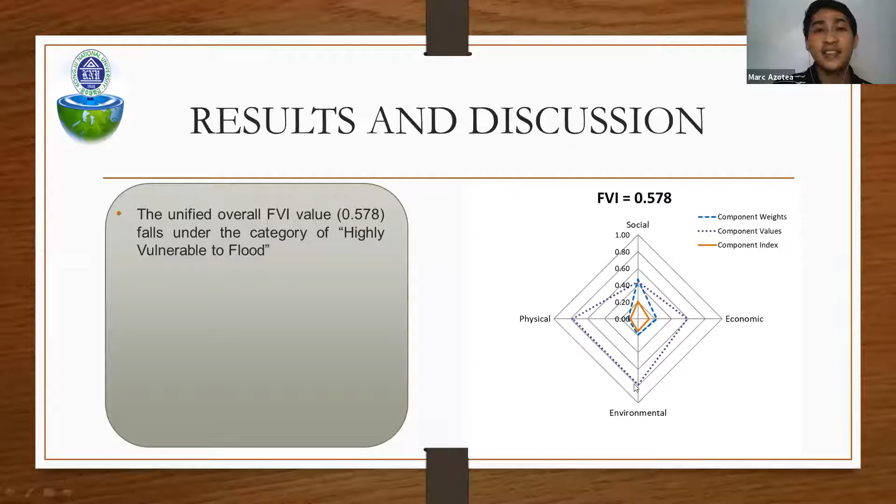So this one is already the overall total FVI of the 5 areas. Their total is 0.578. You can see here that the physical and environmental component hit the highest among the 4 components. If we base the 0.578 value on the qualitative category I showed you, it is in the range of 0.5 to 0.75, which corresponds to a highly vulnerable to flood state.

This also shows that the socioeconomic components are at the utmost priority, which is good, because I think all researchers and all people will agree that the reason we are doing this research is because we want to prioritize the welfare of the people, and their safety as well.

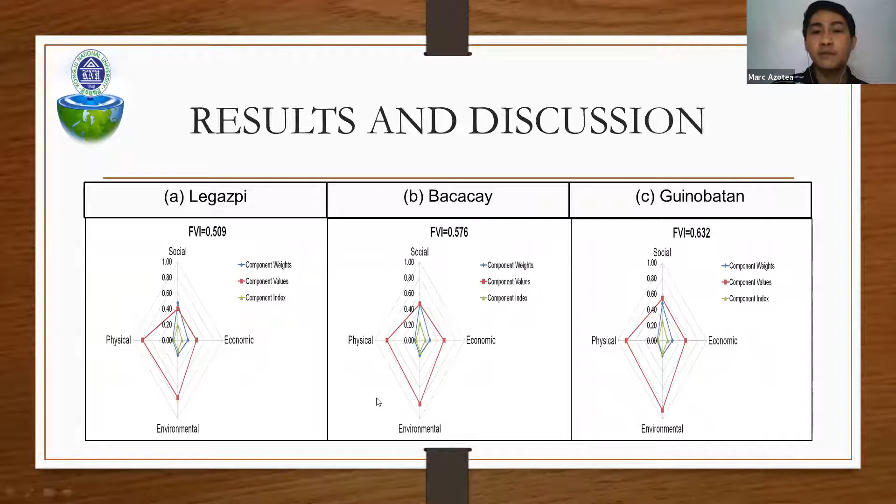So here I will show you the individual flood vulnerability index values of each area. For Legazpi, we have an FVI of 0.509. For Bacacay, we have FVI of 0.576. For Guinobatan, we have 0.632. As you can see here, all are also highly vulnerable, with both the physical and environmental components at their peak. For Camalig, FVI is 0.521. For Manito, it's 0.655. So still, the physical and environmental components are at its peak.

So finally, here is the result of the comparative radial analysis of the components. I just compressed and compiled all 5 areas with their 4 components. As you can see, for the green and purple lines in the radial analysis, all are at their highest, while for social it's a smaller value. Economic has a little spike, but still not as high as compared to both physical and environmental.

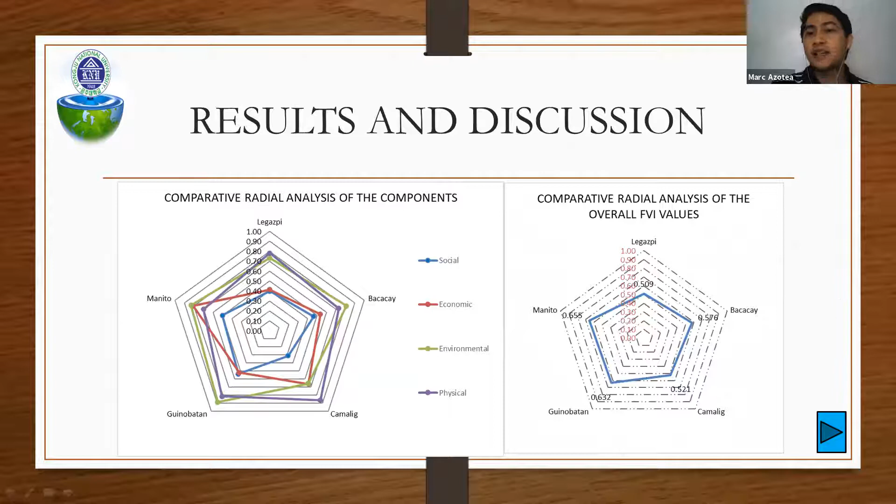This one is the comparative radial analysis of the overall FVI values, the individual FVIs of each area shown earlier. I just used one graph for all 5. So you can see the values again: 0.509 for Legazpi, 0.576 for Bacacay, 0.521 for Camalig, 0.632 for Guinobatan, and 0.655 for Manito. Now, what can we conclude from this comparative analysis of these 5 areas?

Well, one, we can say that this study has already established a comparative radial analysis of flood vulnerability index and applied it on a local scale, 1 city and 4 municipalities, that assesses the extent of vulnerability into, first, each area, and second, the overall or total FVI value. Among the 5 areas, Manito depicted the highest FVI value at 0.655, followed by Guinobatan at 0.632, then Bacacay at 0.576, next Camalig at 0.521, and finally the central city, Legazpi, at 0.509.

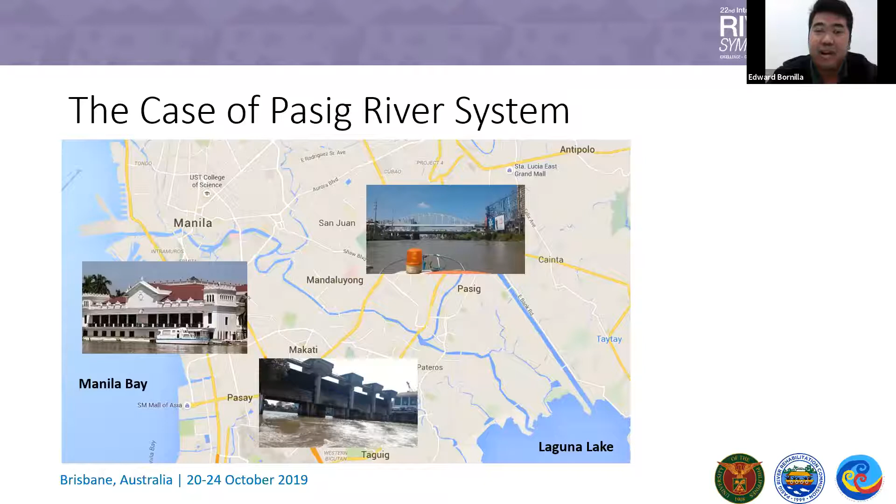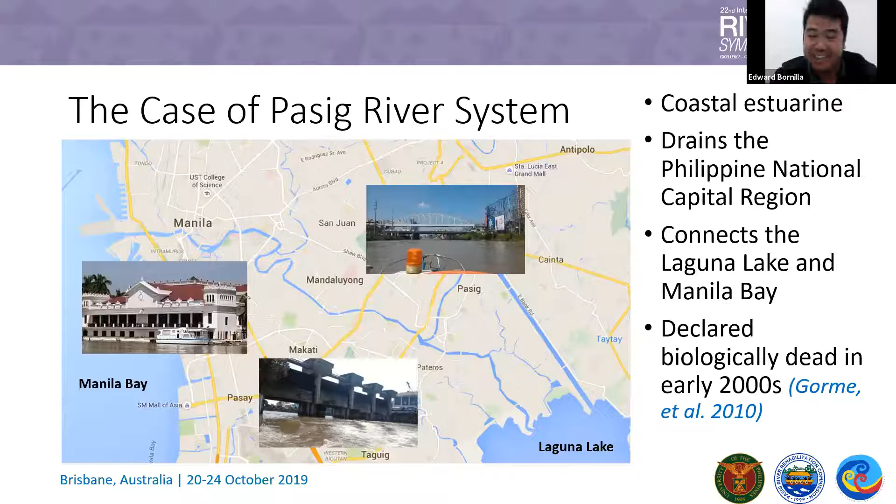So the good thing about the Pasig River is it is constantly monitored by the Pasig River Rehabilitation Commission, particularly the water quality data, where there are 14 established water quality monitoring stations since 2009. On a monthly basis, they collect water samples for analysis using the DAO 34 series of 1990 standards, and then the DAO 2016-08 standards, which now include nutrients like nitrates and phosphate.

So for this study, I will be focusing mainly on the Pasig River channel, using the water quality data from Napindan, Bambang, down to Jones Bridge and Manila Bay. And I'd like to show the trend of the water quality results, particularly the dissolved oxygen and the biochemical oxygen demand for the main channel, as well as two major tributaries.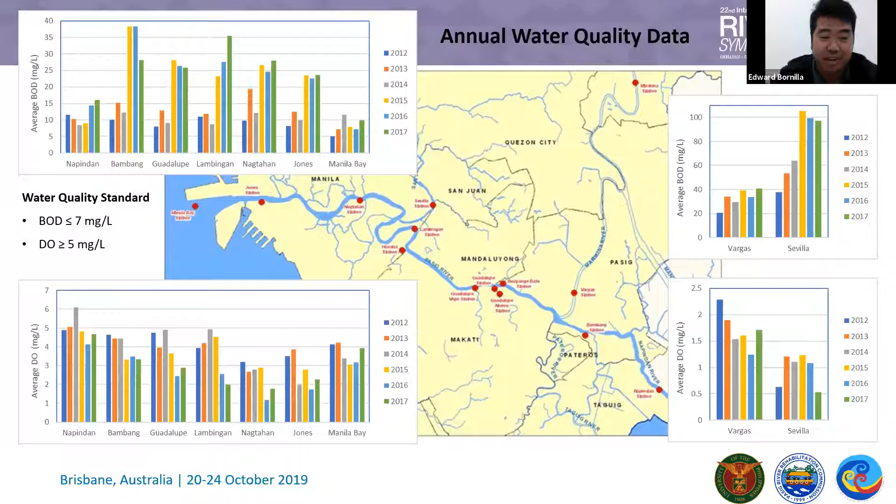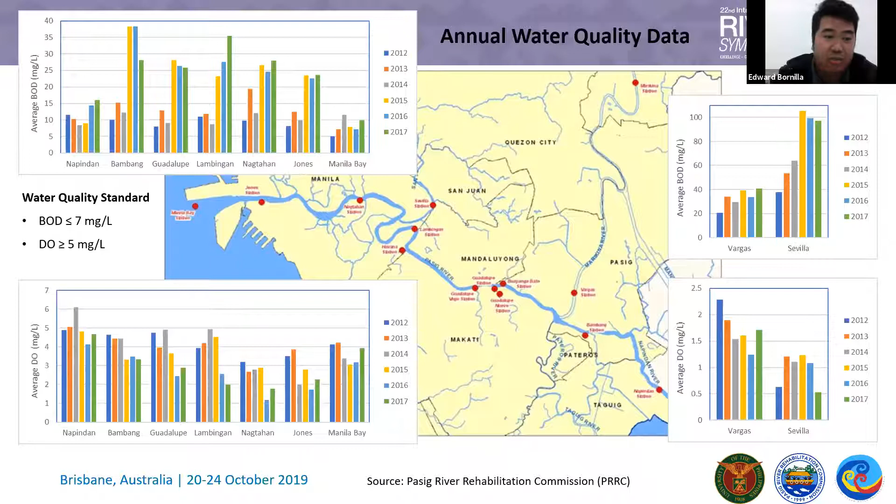But looking at the values in this table, or rather on the graph, you see that BOD far exceeds the standards, and that the dissolved oxygen at some water quality monitoring stations are below 5 milligrams per liter, or can be considered hypoxic.

So this modeling activity was decided based on the situation that this is an academic research, actually a term paper for my water quality modeling semester in IESM. And I developed this system dynamic model to understand the nonlinear behavior of surface water dissolved oxygen and biochemical oxygen demand over time as water moves downstream.

The possible applications I thought of at that time were to reconstruct pollution transport and identify the hypoxia hotspots along the river channel of Pasig River, and estimate the BOD load contribution of the Pasig River watershed to Manila Bay, which until now is still a hot topic given the Manila Bay mandamus, the Supreme Court mandamus, to clean up and rehabilitate Manila Bay. And lastly, I thought of estimating the daily allowable biochemical oxygen demand load from Pasig River tributaries to attain the Class C water standard, which is the main goal of the Pasig River Rehabilitation Commission.

So how does a water quality model look like for a river system? Think of this specific portion or segment of a stream, wherein if you see the blue lines on the left, with the dissolved oxygen concentration at 8 ppm, as an effluent is discharged to the river or channel, you will see that the level of oxygen drops and the level of concentration of biochemical oxygen demand increases.

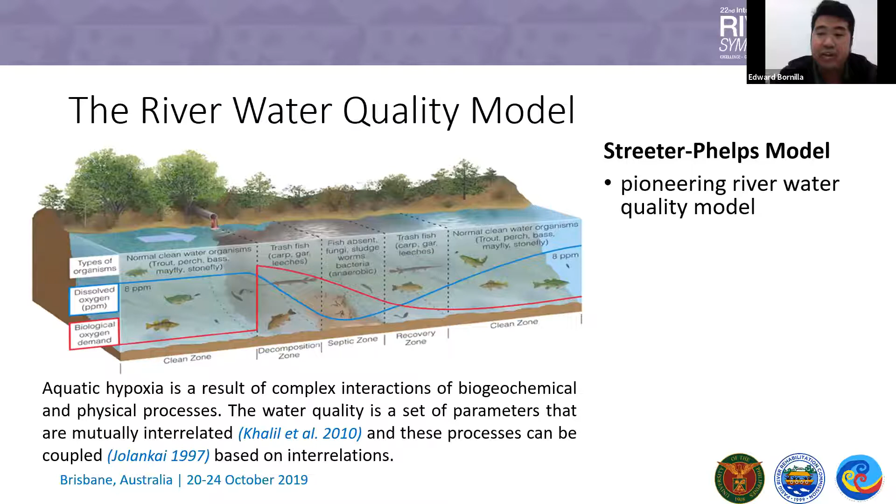So over the past century, these observations were transformed into mathematical equations. And now we have the so-called Streeter-Phelps model, which is the pioneering river water quality model, which shows how dissolved oxygen is consumed to degrade biochemical oxygen demand in water. So it's a mathematical description of the decrease of DO concentration by the degradation of BOD along a stream, as you can see in this illustration.

So I tried to make a conceptual diagram about the water quality parameters and some physical and biochemical processes that will affect the concentration of dissolved oxygen. Physically, surface dissolved oxygen can be increased by reaeration coming from atmospheric oxygen. However, inside the water column, this can be degraded by the presence of biochemical oxygen demand and will also be consumed during denitrification by the transformation of ammonium species to nitrate.

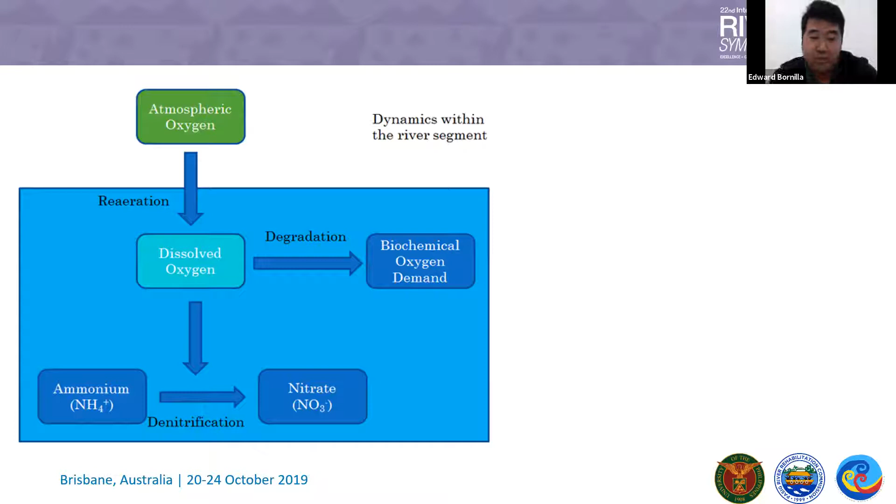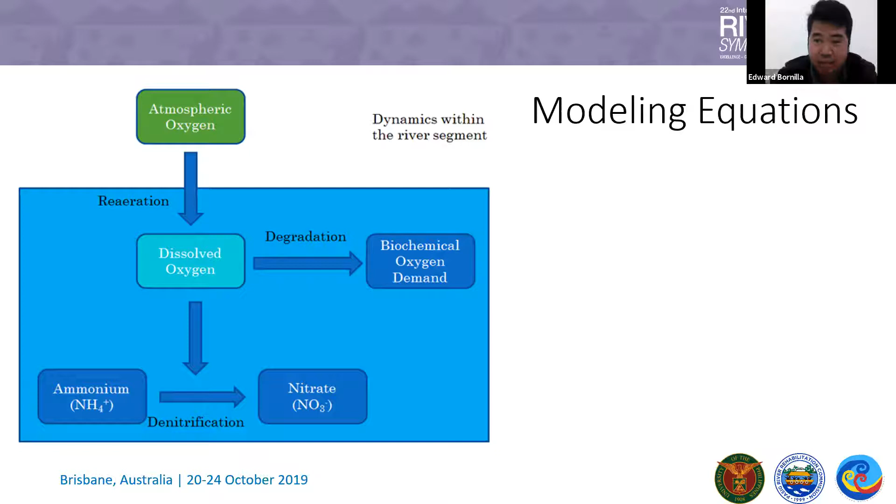So there are a lot of modeling equations, but for the purpose of this study, I tried to look into the simplified equations covering the BOD decay, the temperature correction, since the Streeter-Phelps formula utilized the reference temperature of 20 degrees centigrade, and then the oxygen deficit equation, the saturation equation of dissolved oxygen, the aeration coefficient, the denitrification, and so on. I based this on the paper of Jolankai, and the equations can explain the nonlinear DO and BOD interaction as water moves a distance downstream.

So at this point, you might wonder, what do I mean by this nonlinear DO and BOD interaction? Think of the population dynamics of an area wherein a population of rabbits are feeding on the grass, but these rabbits are being eaten also by a pack of wolves. The changes in the population density of the three species are a good example of what we call nonlinear system dynamics.

I use that analogy also for this change in the DO and BOD for a water body or stream. If I represent all those equations I mentioned in a platform called STELLA, which is a system dynamics modeling platform, it will appear as this one, where you can see the dissolved oxygen model here in the middle is affected by the BOD decay, the reaeration, and the denitrification.

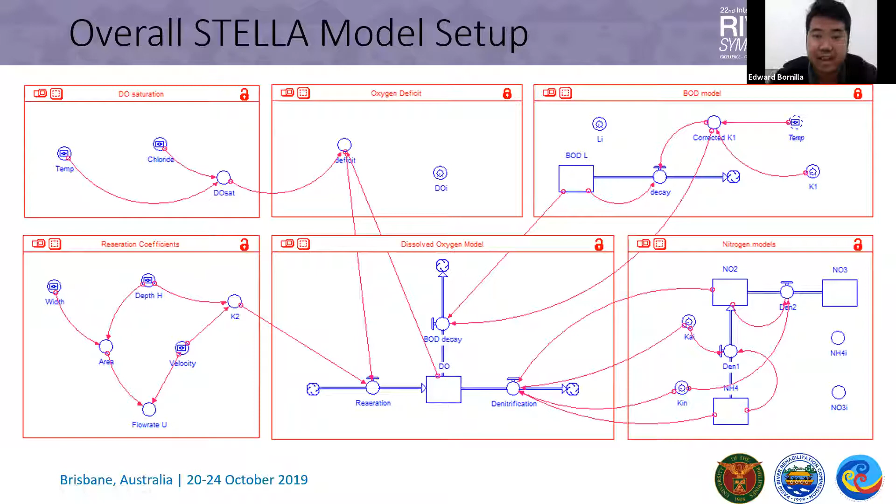But all these processes are affected by several factors. I'd like to emphasize the reaeration - the surface reaeration is actually affected by the depth and velocity of the water. Whereas, on the right side, denitrification is affected by the concentration of the species NH4 ammonium, the nitrite, until oxygen is consumed to produce nitrate. So this is how I set up the model in the STELLA platform.

And for the user interface, this is one of the best features of STELLA. The modeler can set up this interface wherein you can present the results in a graph or in a table like this one. You can adjust some parameters, like in this case F, which is the factor of...

K2, or the reaeration constant over the deoxygenation constant, as presented on the table on the right, which varies depending on the flow rate of the stream or river. And also there are some sliders here, like for the river temperature, which I adjust depending on the season - for example, the temperature of water coming from Pasig River varies depending on our seasonality and amount of rainfall.

Lastly, here I have some knobs where I adjust the initial temperature, initial background BOD, or the value of existing BOD at the river channel, particularly that river segment, and also the present background dissolved oxygen, which will serve as the initial values for the modeling simulation.

So the STELLA user interface has run and stop buttons, F value and temperature sliders. The modeler who would like to develop this kind of model can modify all of this. I also added the background DO and BOD knobs, which I did not find in some other modeling tools. And for visual representation, I added a graph and a table for the results.

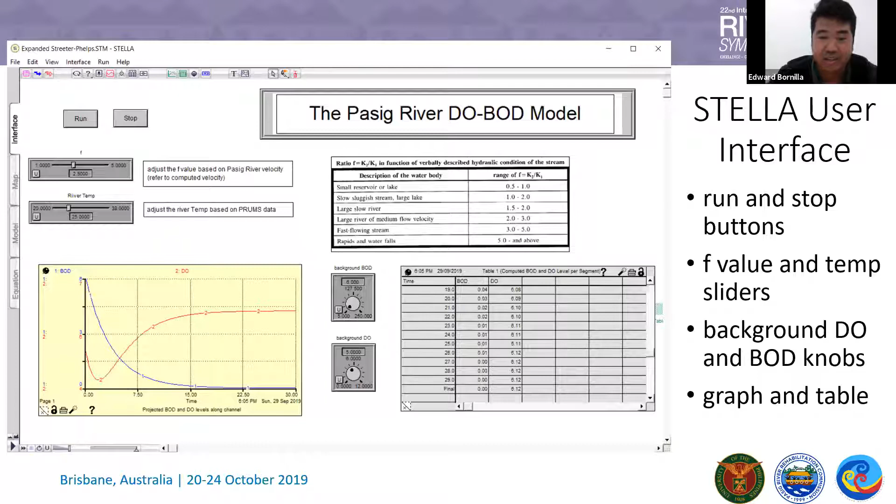So I now go to the results, particularly the sensitivity analysis, which I think was introduced by JC in his first presentation earlier. This is to identify the important parameters that affect the model results, particularly for the dissolved oxygen and biochemical oxygen demand. Sensitivity analysis is done by varying each of the parameters by a set percentage.

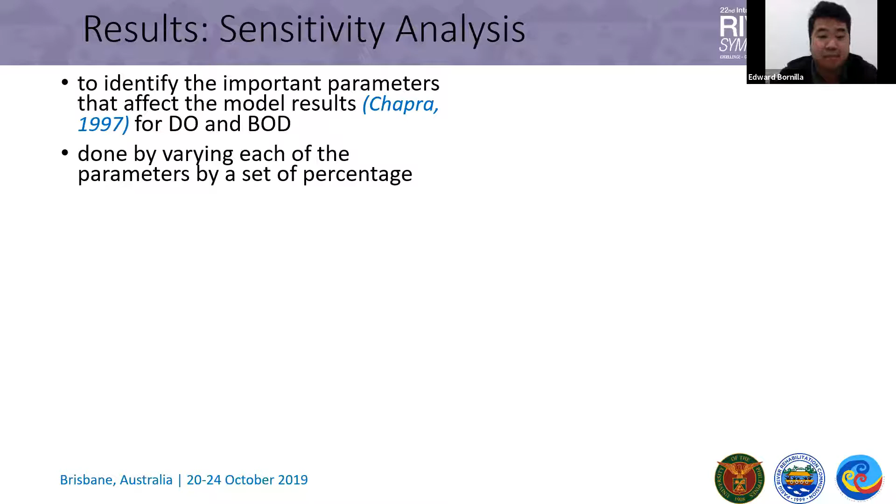And another thing that I like about STELLA, although I'm not an endorser of it, is that the STELLA modeling platform has a built-in parameter perturbation technique for sensitivity analysis. So if I change several parameters, as you can see in these graphs, if I compare the sensitivity of...

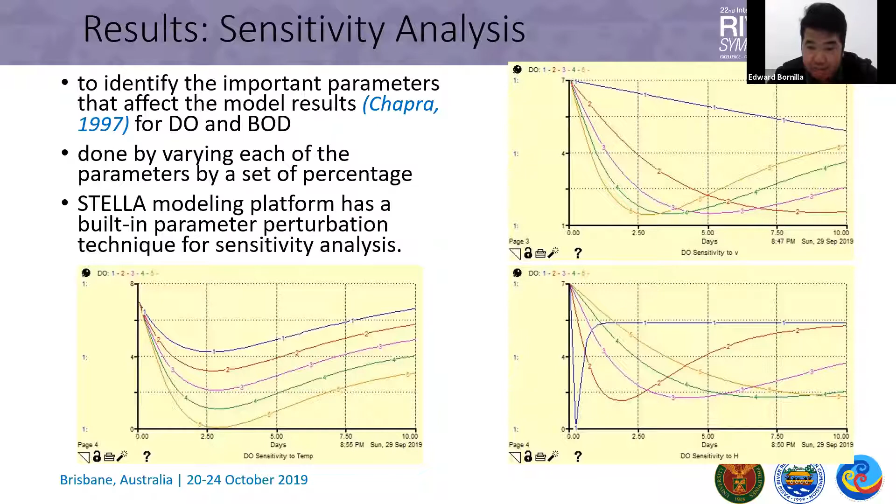dissolved oxygen to varying temperature, I will get this graph wherein it still follows the oxygen sag curve, but there are some values of temperature where dissolved oxygen will reach anoxia, or in some values of temperature, dissolved oxygen will reach hypoxia after 2.5 days. Other illustrations are the sensitivity of dissolved oxygen to the velocity, and also the sensitivity of dissolved oxygen to river depth.

So for my sensitivity analysis, the parameters were set to 7 milligrams per liter dissolved oxygen, which is higher than the Class C standard, then 15 milligrams per liter BOD, quite small, 2.5 F, and 28 degrees water temperature. I ran the model 5 times for 10 days at different parameters with fixed increments, using the increment suggested by STELLA. And I got a result like this for the BOD sensitivity to temperature using the parameters that I used. So what are my findings here?

Dissolved oxygen sensitivity to temperature from 20 degrees to 32 degrees. DO is sensitive at higher temperatures, and at higher temperatures, a certain portion of Pasig River can reach hypoxia and anoxia.

This has been validated when we had anoxic condition for Pasig River back in May 2015. As some of you can recall, during that time you could smell the dirty environment of the Pasig River, and the color of the river water was silty.

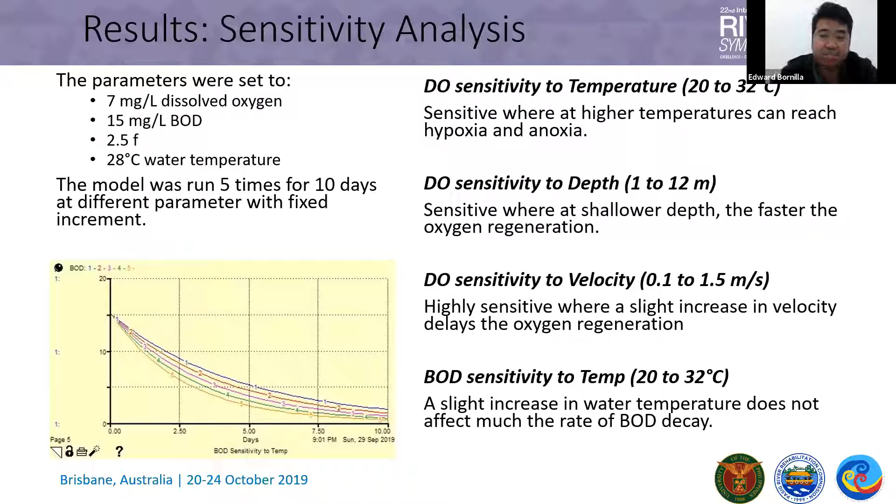So I compared the results. I selected the Napindan station for my scenario building, comparing the dry season and the wet season using certain values or parameters. For comparison, this is the result of the projected BOD and DO levels.

For dry season, on your left, in less than a day it is probable for dissolved oxygen to reach anoxic levels as it moves downstream. The rate of decomposition of the biochemical oxygen demand, this blue line or graph, is low as compared to the wet season.

Although at some points downstream, dissolved oxygen reached anoxic condition during the wet season, it was able to regenerate its concentration enough to immediately decompose the biochemical oxygen demand present in the river segment.

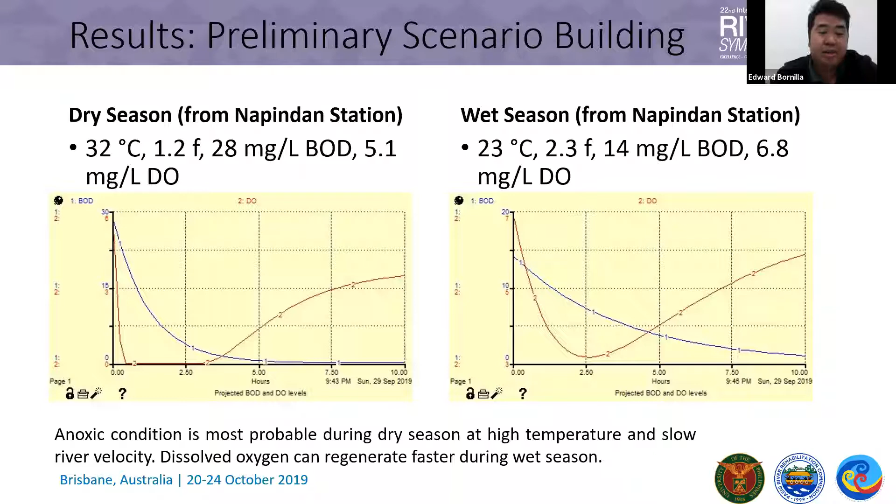So anoxic condition is most probable during dry season at high temperature and slow river velocity, and dissolved oxygen can regenerate faster during wet season.

For further development, which I wasn't able to do given the limited period for that semester, we can still conduct this segmentation, wherein the boundary conditions will be based on the distance of each confluence point from Laguna Lake. Using GIS, I was able to measure the distance of each confluence point from Laguna Lake in kilometers.

And we can still perform this water quality modeling for Pasig River to complete the whole stretch of the river basin.

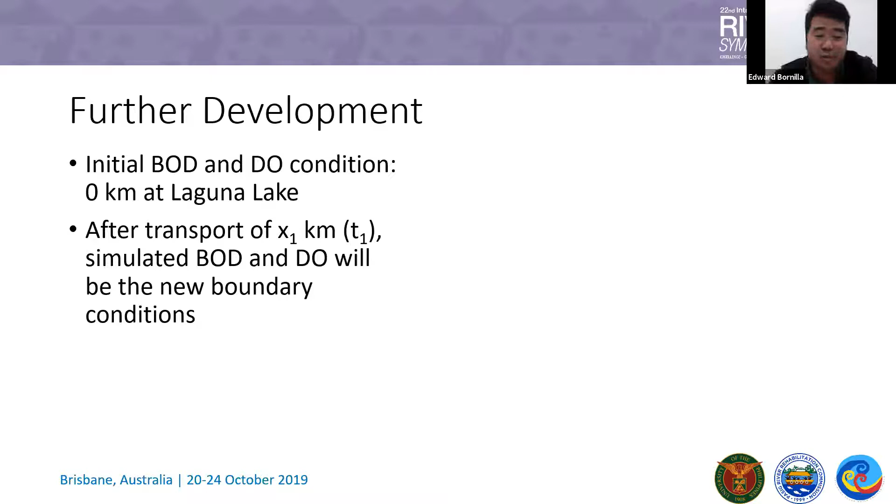I'd like to move my screen. The initial BOD and DO condition will start from Laguna Lake at 0 kilometers. After transport of X1 kilometers for the first time step, the simulated BOD and dissolved oxygen will become the new boundary conditions. So how does it work?

For this one, if you see LL and ULL for BOD naught to BOD1, this portion of the river channel will be simulated by STELLA. Then by the end, whatever concentration of BOD and DO results will be mixed with C2 and QC2 as the new boundary condition for the next segment, until we reach the 27 kilometers to Manila Bay.

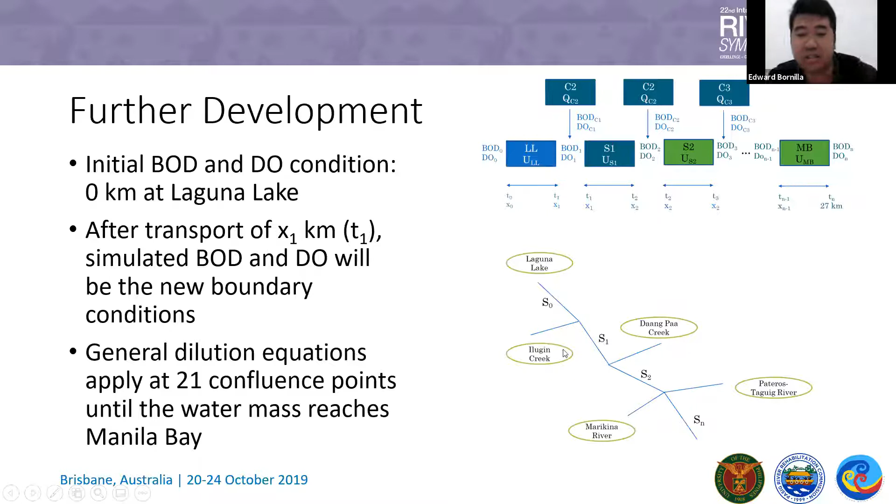General dilution equations will apply at the 21 confluence points until the water mass reaches Manila Bay. Here's a simplified illustration: from Laguna Lake, we have S naught or segment 0 as the initial segment, segment 1, segment 2, up to segment N until Manila Bay, where additional inputs from the tributaries will contribute to the changes in the concentration of dissolved oxygen and biochemical oxygen demand.

Another future step for those who are interested to continue my project, which I am very much willing to support, is that calibration is also required to fit the model to a data set, drawing from the water quality data.

Since I did this in 2018, I considered 2016 and 2017 monthly water quality data for calibration, and for validation, the comparison of simulation results uses the 2018 actual data. Unfortunately, we don't have a complete 2019 water quality data for Pasig River given the disestablishment of the commission a week after I presented this last year.

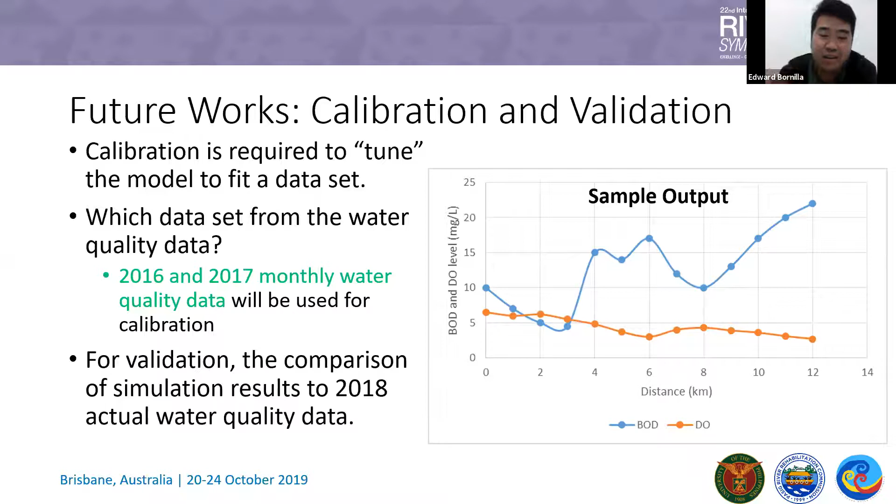If I represent all these model segments as a simple graph, the sample output will look like this, where the DO and BOD level from 0 kilometer up to 27 kilometer is represented by these graphs. Using this table, we will see exactly where in Pasig River we can experience hypoxic or anoxic conditions, and which tributary contributes the high volume of biochemical oxygen demand, and where in Pasig River.

I experienced a lot of challenges in doing this. Particularly, Pasig River is tidally influenced. The assumption for my model is that there is no tidal influence by the changes in the water level of Manila Bay and Laguna Lake.

Another challenge is the consistency and availability of water quality data, which I highly depended on from Pasig River Rehabilitation Commission. There was also limited hydrologic data, where for the cross-sectional area of Pasig River, the latest data is dated September 2009, after NAMRIA had conducted the bathymetric survey after Typhoon Ondoy, and this was not yet updated.

And also my technical skills as a modeler, or the modeler user. So simply put, I wasn't able to finish this.

But I see some opportunities here that this can still be a science-based tool for managing the Pasig River. For example, where in Pasig River will we do the dredging and when is the best time to do it? Where can we put some water quality management projects to improve dissolved oxygen and significantly reduce the volume of BOD prior to its discharge to Manila Bay, and so on.